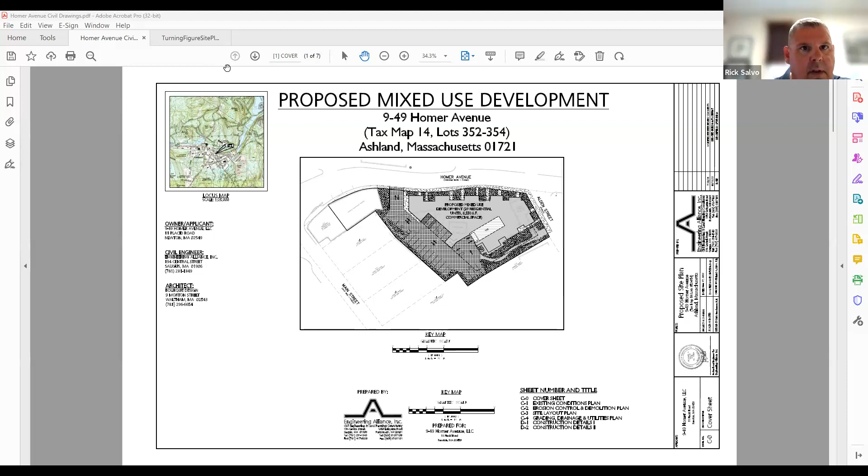Jump straight to the site layout plan here. So I think the largest changes since this was last presented had to do with the emergency vehicle access through the site.

If I switch real quick here, we had prepared, at the request of the fire department, an emergency vehicle turning movement through the site. Through peer review comment, it was suggested that a slightly larger vehicle be used, which is what you see here on the screen. It's called a bus 40. We had used a single unit 40 at the fire department's request.

The peer review requested a slightly larger vehicle, for which we show the vehicle path, which now will pass through this area right here, which will include a reinforced lawn comprised of a series of concrete octagon-shaped pieces that get filled with loam and seed, and then a lawn grows over them. They're maintainable, drivable, and H20 rated. Here's what that path looks like, zoomed in.

The gray crosshatch you see represents the building that will be sticking up out of the ground. The heavy dash line is the garage level below, which is below ground. This path right through here is a combination of reinforced lawn, H20 rated pavers for a walking path while emergency vehicles are not driving through there, and then regular loam and seed over the deck of the garage.

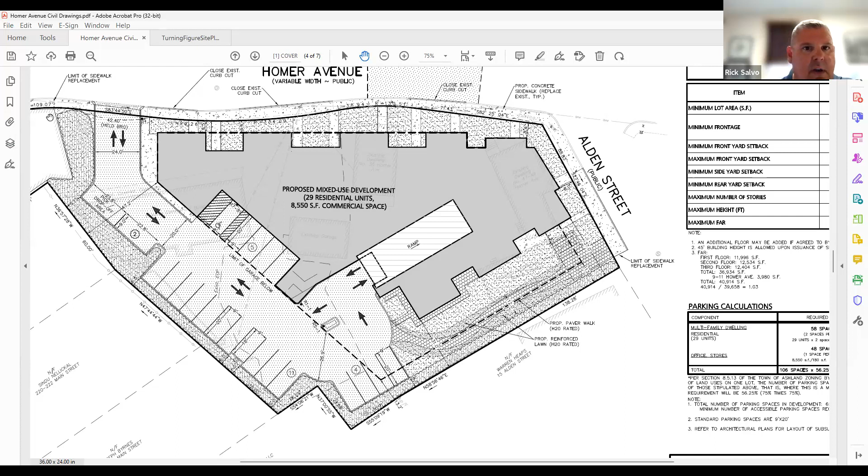Those are probably the largest changes. There were a lot of small technical changes that I'd be happy to walk through as part of the peer review comment, involving things like adding the utility poles to the plan, which had already fortunately been surveyed, and we added the fire hydrant locations, which would be at either end of the project.

We added a drain manhole on the overflow pipe and changed the overflow pipe to a reinforced concrete pipe in accordance with the town of Ashland requirements. We'll be repaving this whole section of road from curb to curb, because when we close this curb cut, there's a low point that would trap water. By eliminating that low point, it'll flow down to the catch basin like it's intended to, rather than into the site, which is what happens now. There were also some supplemental calculations required for the drainage system, which we've provided and included.

Those are essentially the site changes to the plan. I think, as you can see, by and large it looks like a very similar plan to what you saw last time, but those were the civil changes that were made.

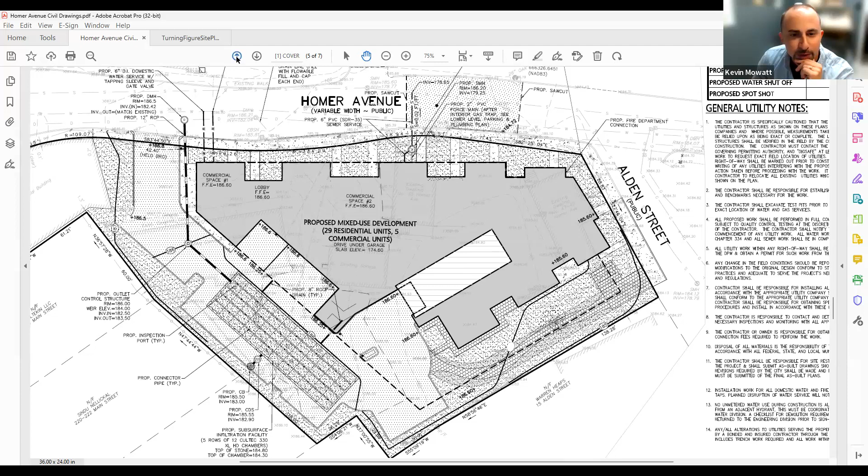Could I ask a question about the pavers? Did you say that they're plantable, or is it a mixture of hardscape and softscape within the pavers? The hardscape area, shown by this brick hatch, will be just that, hardscape. The area in between, with these octagon shaped pieces, if I zoom in here, between the regular loam and seed, will be planted.

And they're planted with what? Loam and seed, grass. What kind of grass? I'm not sure what exact species of grass. I'd defer to the landscape architect for that.

Can I jump in? Sure. So that is actually a clover grass and wildflower seed mix provided by Vermont Wildflower Farm. This is a very low growing seed mix that probably won't exceed 6 inches. It's clover and what? Clover, grass, and wildflower.

What kind of grass? I can check and get back to you when I present the landscape design portion of this. Okay, great, perfect. I'm interested in that in terms of its ability to withstand drought, traffic, et cetera.

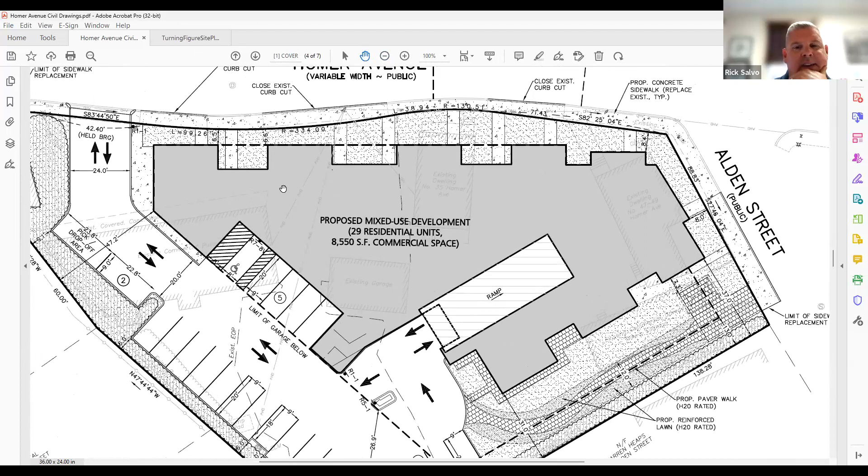Thank you, and what was the size, just since I'm taking the minutes, what was the size of that vehicle you were talking about? It's an AASHTO bus-40. So like I said, originally in the comments we received from the fire department, they wanted us to use a single unit 40. The peer reviewer suggested a bus-40 might be more appropriate, it's a slightly larger vehicle. So we ran that vehicle and it worked just fine.

Any other questions from the committee at this moment, or can we move on to let them finish the presentation? Oh yeah, I just had one more question about the drive lane for the fire truck.

Is the curb between the parking lot and where the fire truck would enter into that paver system area, would that have a chamfer on it? There's a curb there that would prevent normal vehicular traffic from going in that direction, but it has kind of a 45-degree chamfer to allow it, we'll make sure that this is a piece of granite edging.

That's a good point. I mean, they can come up a 6-inch curb reveal without issue, but why not make it a little easier for them? I think that's a good point. Yeah, I've seen that before, so I'm just raising the question. Yeah, we'll specify that piece as granite edging. I think that's a good point.

I don't have anything else, Kathy. You can continue on with the rest of your presentation. Great, thank you, gentlemen, floor is yours again. Ron, I'll turn the sharing over to you.

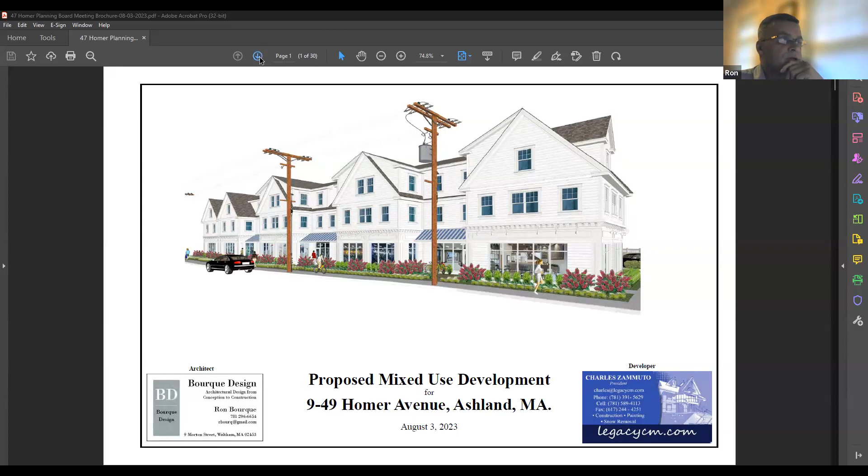So this was based on the discussion we had in our last meeting, addressing some of the issues and concerns that we had. I will just run through this, and there's also landscape in here which Julian will take over. This is the common information, so I'm just going to pass by this.

And the value in this is obviously in the shadow study itself, but also in the discussion about potential solar on the roof.

I think we can see that the south-facing portions of the building are really solar ready. The benefit is that they are not directly visible from the street, so if you're coming down Homer, unfortunately with solar panels, they don't always fit the roof correctly, they don't have triangular pieces and things like that, so sometimes it detracts from the building, although you're trying to do the right thing.

But in this instance, where we have this southern face, and even the face that's on the south, I guess the north side of the terrace, but the south face of the roof on Homer, gives us some opportunities to have, I think, some significant panels there, while maintaining the architectural look we're trying to achieve on the public side of Homer Avenue.

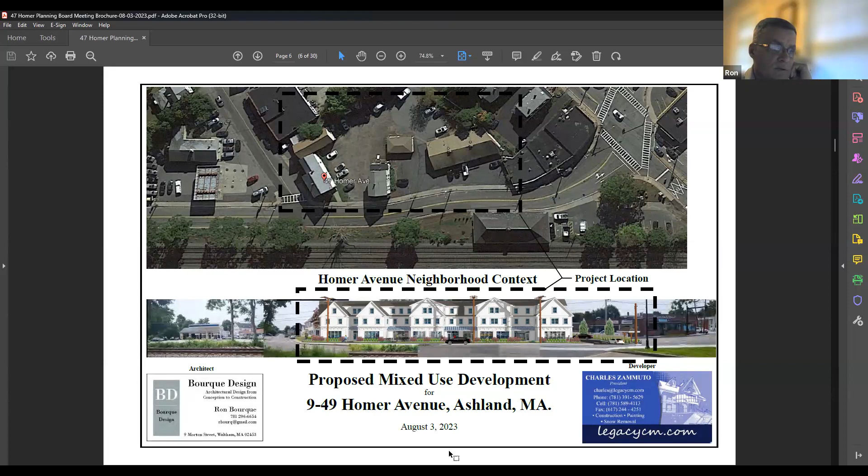It meets the massing. If we look at the Alden Street elevation next, we'll see how the volume is consistent with what's on that street. This is Alden Street, left to right. The right is Homer Ave. Our project site is shown, and then there's a massing of the building, which is a little skewed because of the way Homer Avenue runs, but it does give you an idea of how the massing would fit into the neighborhood.

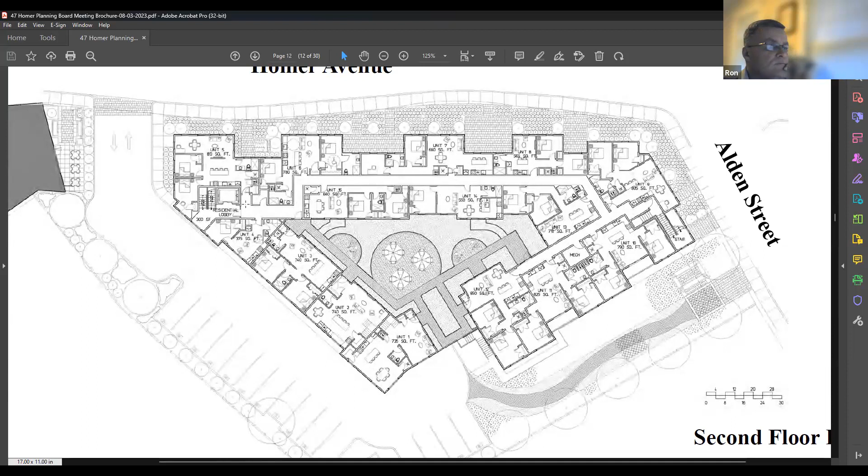I've also, in designing the units, paid attention to creating situations where you weren't looking directly across into a bedroom on a short axis, as well as Julian's planting scheme. We've kind of denied the space closer to the bedrooms along here with raised planters and plantings, so people will not be able to be directly above or directly in front of a bedroom window within close proximity. How high are the planters? They're 18 inches. Okay.

On the left side, we have smaller dormers, so it'll be a little more difficult to have anything really consequential, but it really does help the project's resiliency. Also, not having them directly on Homer — that's not the most efficient location for them — I think helps the project, because it solves that problem we always see with solar panels sticking 6 inches off the roof and being square boxes on triangular roofs. So you're proposing putting them on the flat roof sections, the 500 and 740, 750?

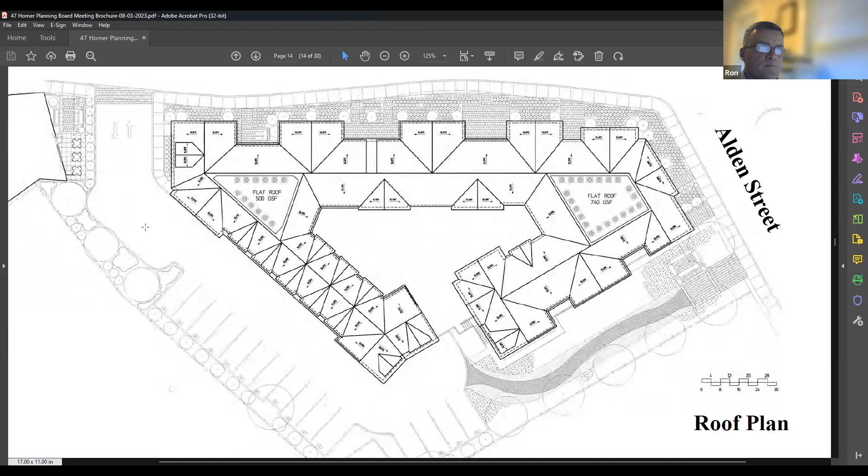Ron, before we leave the plans, I have some questions about level 1, if you could go back to that. My understanding was that we were going to see a plan that showed more commercial space on Alden Street, and I thought Unit 2 was coming out. Could you just remind me and tell us what transpired about that corner? Because I was expecting Unit 2 wouldn't be there, I think.

Well, we had discussed sort of reconfiguring it. I don't think we discussed enlarging it. I do have a stair here, which serves from the garage to the 3rd floor, which takes up this corner. Everything else beyond that is for commercial. Where's the entrance for commercial on Alden Street? Right here, in the corner? In my corner. Let me zoom in.

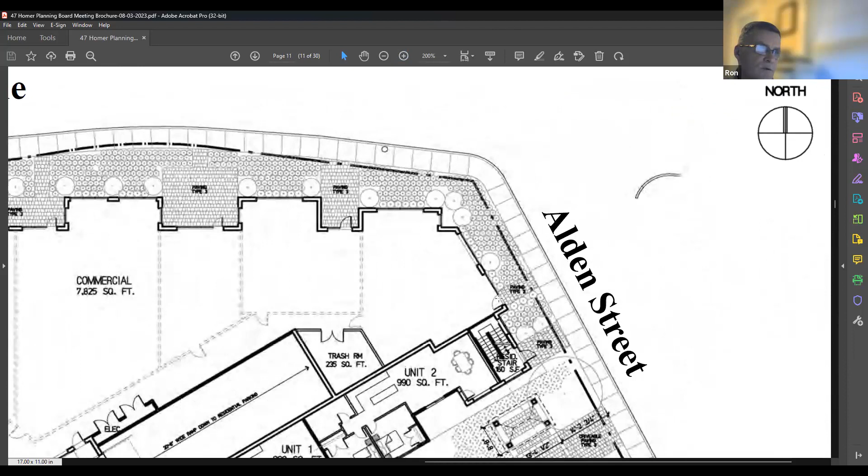So it's off the corner, off Alden Street.

I'm going to mark this up. Is this the space we were talking about last time, that the plan would be revised to show the additional commercial tenant space at Alden Street? That's this space here. There were originally three units along that pathway. One was eliminated and the other two were reconfigured. That's how I read it. Is that correct, Ron? That's correct, right?

So I'm looking at the previous first floor. The commercial went to the corner and the stair was essentially where the commercial entrance is. Then we had units 1 and 2. Unit 2 extended basically to the corner of the trash room. That was pulled back, and that space was given to the commercial space, noted here as 800 square feet. I'm not sure of the exact square footage, but I think it was comparable. And the stair was shifted to the corner.

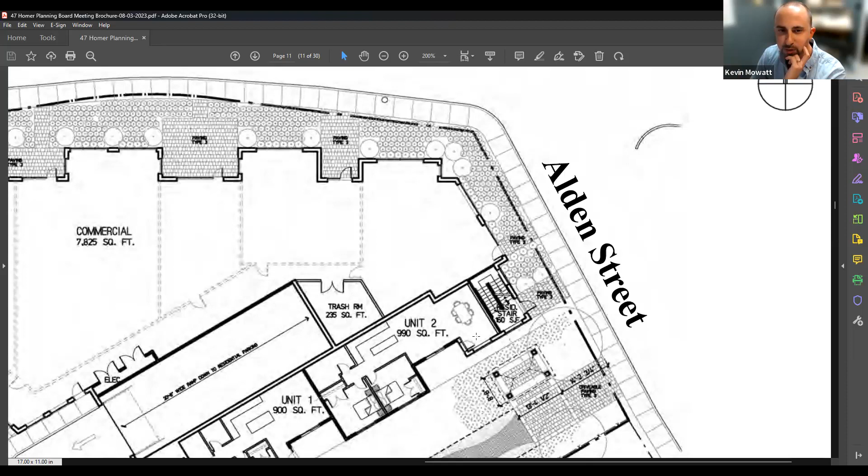So the commercial space was shifted more towards Homer Ave where this door is located. But I found the plan that was provided previously where the stair was shifted, sort of in this location. So what was the reason for moving the stair?

Well, if you go to the basement floor plan, there's only so many locations that the stair on that end of the building can be placed. The building notch is in here. The stair was located approximately where space 28 is, and it created a situation where traffic coming down the ramp was running directly into the stair, which I didn't think would be a good idea for pedestrian traffic walking through there, and then find a common area through the first, second, and third floors.

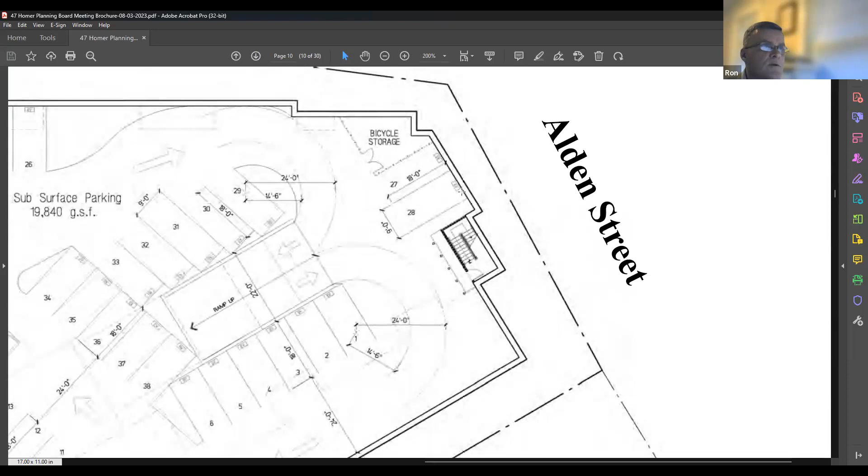I see, okay, so it was a result of continued planning efforts. Yeah, that's right, that's correct.

Okay, so my other question was, is this the second floor? We had talked last time about shifting this bar plan north, and you said you moved the south wall, the south red line, but did the whole bar move to modify the depth of the recesses at Homer? It did, but it only moved 2 feet, I believe. The impact on the roofs made it very difficult to resolve the ridge lines. So I was able to move it 2 feet, and then on unit 12, the wall south of the...

I guess I could use the same thing you're using. Sorry. The wall on unit 12 was shifted back as well, to give myself the 4 feet we were asking for—I couldn't get it all on Homer Ave.

So when you did your shadow study, did that move more of that patio into the light? The plantings? I didn't do the shadow study with the older version, not in the same fashion. I did it on the renderings, which showed it, but I did not go through this particular process.

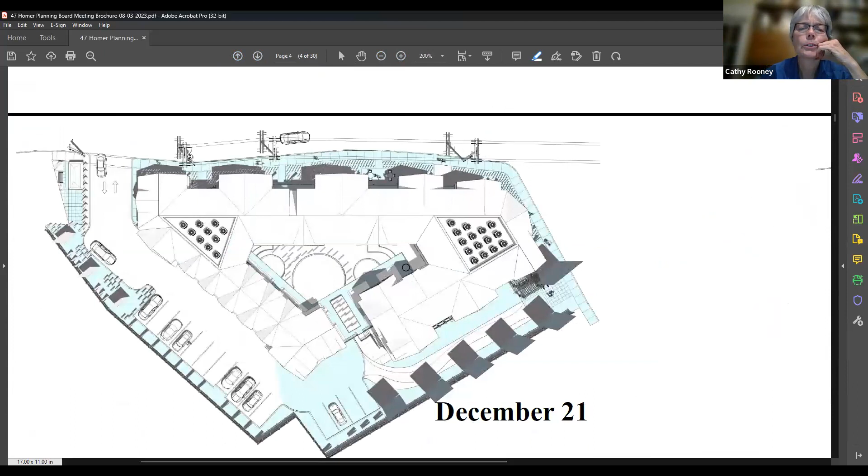Where does it show it? Can you blow it up so we can see those more clearly? They're pretty small. Yeah, I want to see what it shows in the... So this area, December 21st, noon, shows a small shadow. Okay, March, slightly larger. September.

And those shadows on that are from what? In the September shadow you see here, the peak is this ridge to the south of the shadow, and the hash, the little rectangles you see, are actually those plantings I have in the model, but they read as squares when they do shadows—they don't read as a silhouette of the plant. Okay.

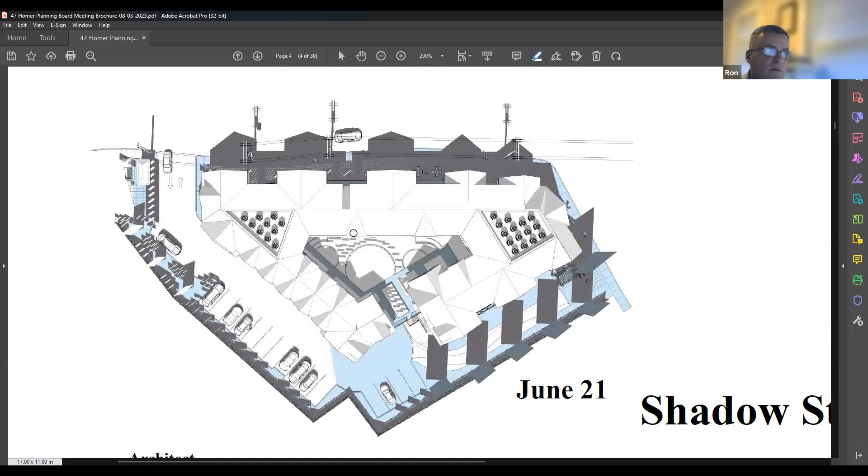So what time of day is this one? They were all done at noon. So the one in December has less shadow? That's what I'm wondering—if I may have reversed one.

When Julian's talking about the landscaping, I'm going to go off share screen and check those. Okay, that'd be great, because that was one of my concerns—what's in the planters.

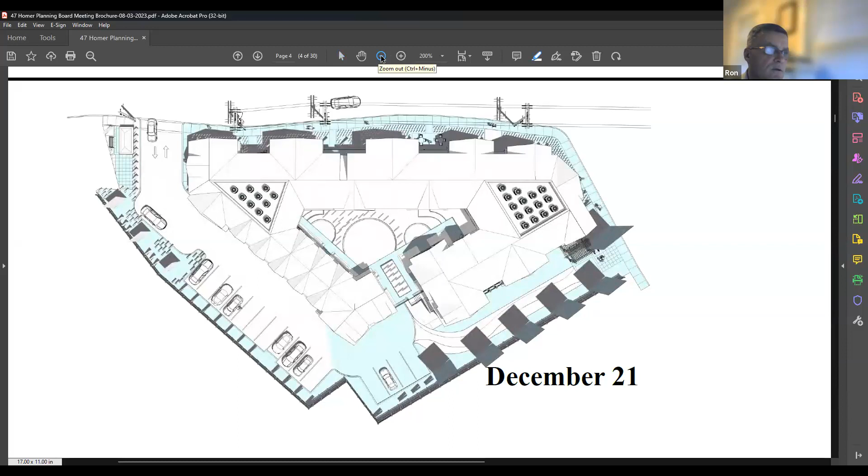A lot of that looks like material that needs more sun than it might get up there if it's in shade during the growing season. Yeah, so as Julian's speaking about his landscape, I'll open the SketchUp model and make sure I didn't reverse these by mistake. Okay, great, thanks.

Does that answer your question on the commercial space? Yeah. The other challenge is to maintain the square footage and parking count balance. If I added 1,000 square feet, I wouldn't have enough parking spaces on site to cover it. So that's the back and forth we're constantly struggling with.

I was just making sure we're looking at the most current iteration of the plan, and it sounds like we are, so I'm happy about that. I'm looking at the previous iteration of the level 2 layout.

After shifting the bar closer to Homer Ave, it does seem more generous. Can you go back to level 2? I think previously there was more undulation to this facade inside this courtyard. I wish it was larger, but I think it's more generous than what you had previously. So I'm not going to comment on that further right now.

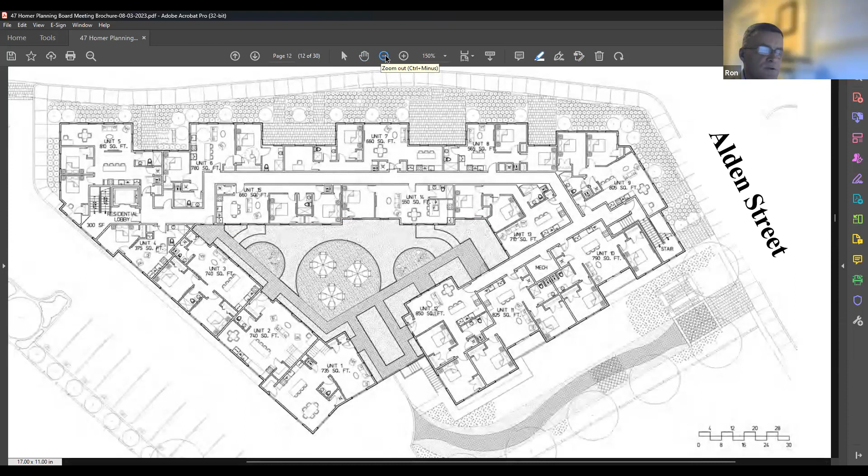So it looks like the overall layout of that courtyard space is new. You completely reconfigured it, right? That's correct. We looked at the plantings, the raised planters, and the comments that were made, and Julian went back to the drawing board and came up with an alternate that he'll discuss, hopefully something that appeals.

So there's a request to do the straight-on elevations, which we had done, it just wasn't part of that package. You haven't sent these in to us yet? This was part of the original package I sent. Okay, good, that's what I thought.

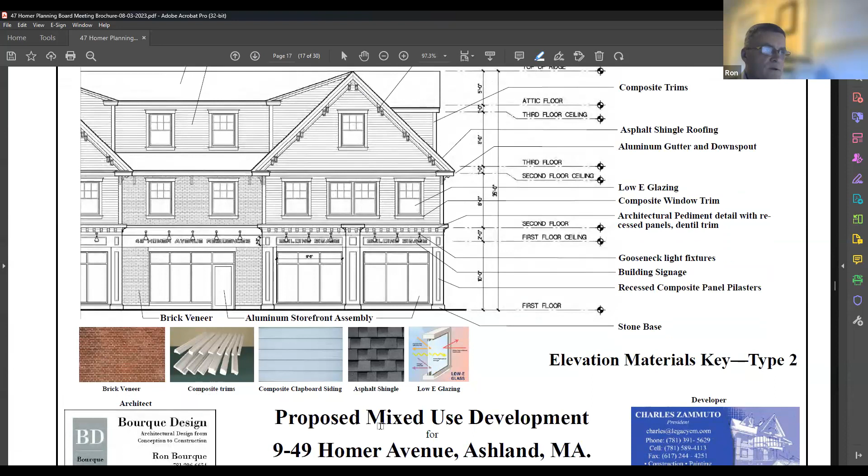Now this one, Elvar, the package I sent you this afternoon, because I did a series of swatches on the side here for materials, colors, potential trim colors, complementary colors for the trim and siding. Yes, I did share it, Ron, at the moment I received it, I shared it today. Okay, but that's not this file. No, that's the file you sent me today, this afternoon. So I will follow up, but there are color swatches here representing the trim, the field, and complementary colors if we were to go with this type of scheme, for example.

So what the applicant shared isn't what we're looking at right now? No, this afternoon I had added boxes here showing different Benjamin Moore colors for the color board. All right, so when are you going to send what we're looking at right now? I'll resend that sheet when Julian jumps on with the landscape.

Okay, great. Actually, Kathy, you should have it, I sent it today around 4. Oh, that's the one I saw. Yeah, 3:46. Right, excellent, because I did add some green roof details, just some standard details, and I added these color swatches. Okay, thank you everybody for sending it on.

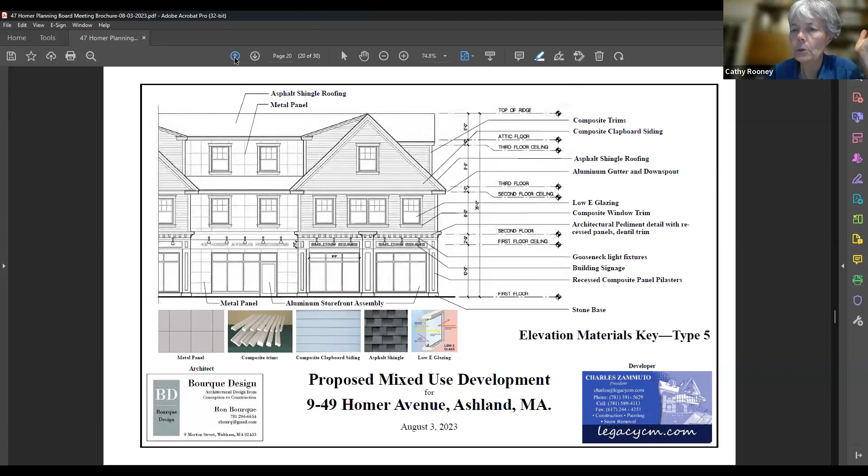Kevin, Hannah, or Bill, do you have any questions or comments about what we've just looked at? I think we should pause and talk about the architectural materials. There were 5 total. The first one I saw was number 2 with the brick in it, elevation materials - that's the elevation that's on the model.

I just want to make a note, Ron, I think you're showing the not-updated version, just the last file you sent me today. I know it's not the updated version, but the only changes were the materials I showed on the left, and there's a couple details. So I'm going to go back to that, and we can revisit this after Julian's presentation, if that can move us along, and I can get the correct file up. Sure, excellent, thanks.

So Julian, can you pick it up from here? Yes. If you could just move the mouse for me, Ron, and indicate the areas I'm speaking about, that would be wonderful. I'm going to start from the front, then move to the left side, to the rear parking area, and then the right-hand side. But to preface, while designing this project, low maintenance, drought tolerance, native plant selection, mature plant height, and solar conditions were all taken into consideration, and all trees, shrubs, and perennials are shown at their mature sizes.

So we're starting in the front, along the front of 9-49 Homer Ave, in front of the large floor-to-ceiling windows, we have a layered mix of perennials and shrubs. From front to back: Carex albicans, Geranium maculatum, Chasmanthium latifolium, and then Hydrangea quercifolia Ruby Slipper. They're the largest shrubs along the front, reaching 3 to 4 feet tall, used to soften the architecture of this development, and located in places that won't obstruct the large floor-to-ceiling windows.

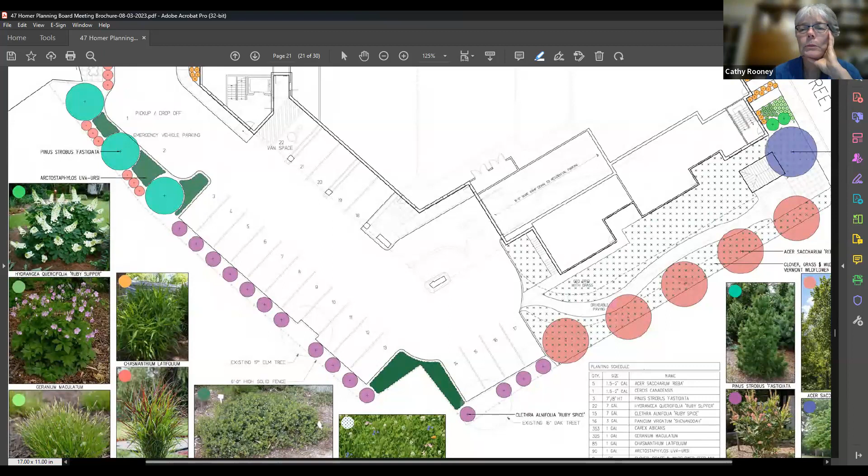Okay, I think you ought to take a good look at the solar values over there, and I don't know how many plants you'd plan to put in there. Maybe you could do them right next to the curbs on the outside and put juniper in the back or something, but I'm fairly certain some of that will not last, and then you get weeds in there. Okay, no, I'll think of a backup for the Arctostaphylos in those locations.

May I continue along the rear parking? Yes, please, of course. So along the rear parking, it consists of a 6-foot wide planting bed that separates the parking spaces from the white fence we were just talking about. Inside this planting bed is going to be a mass planting of Clethra alnifolia, specifically Ruby Spice, a deliciously fragrant variety of Clethra alnifolia. Over time, these will reach 6 feet wide by 6 feet tall and form a thicket, growing together eventually, screening out the fence and offering fragrance and beautiful flowers during the season.

And then I have a note about the Arctostaphylos uva-ursi in between spaces 13 and 14, but like we talked about, Kathy, I will look into alternatives for that. There are some existing mature trees in this area, I believe in front of space number 10 and 14. There are existing elm trees and oak trees, so we're just leaving space for that, and I'm not planting anything too close to them.

All right, so this should show those trees. It does. Oh, I see, got it. Okay, we have a little bump out in front of spot number 10 just to accommodate it.

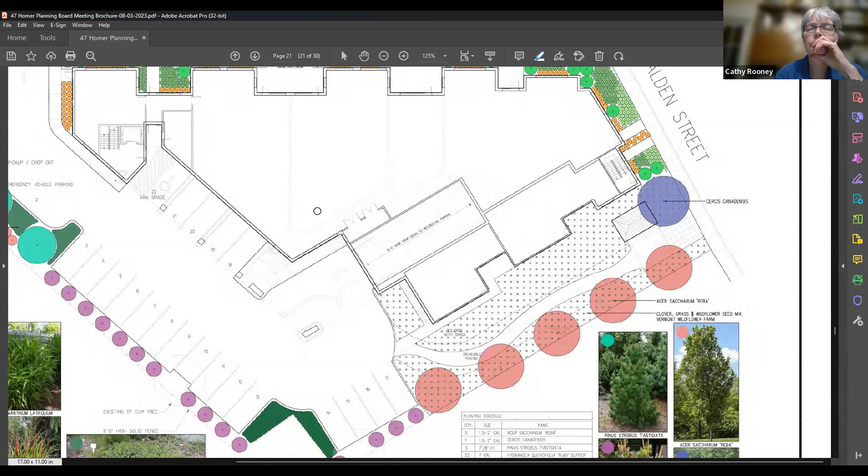A lot of the specs are listed online too on their website, including detailed info like the specific varieties that are included in the seed mix, as well as other information.

Okay, great. But that is all I have for this planting plan right here. I'd love to hear any questions you guys have.

I noted the question you had, Kathy, about the suggestion to potentially replace the Arctostaphylos uva-ursi with another more shade tolerant ground cover. I'll look into that. Or you could keep it towards the outside, where it'll get more sun, but where it's close to the fence, I think my experience says it's not gonna have a good time back there.

And then I want to take a look. I want to see the front of the building, that part blown up more, please. Sure thing, thank you, Ron.

Can you slide the screen so more of that is visible, yeah, that's exactly right, so the facade is more visible. Thank you.

So if your commercial tenants wanted to sit outside, if they had benches and stuff, are there plans for site furniture out here? I'm not showing any site furniture out here. We just have patio space in front of certain commercial areas. There's certainly room for it, and it really comes down to what kind of tenants end up renting a space. So you wouldn't provide it as a matter of course, the tenants would be responsible for it?

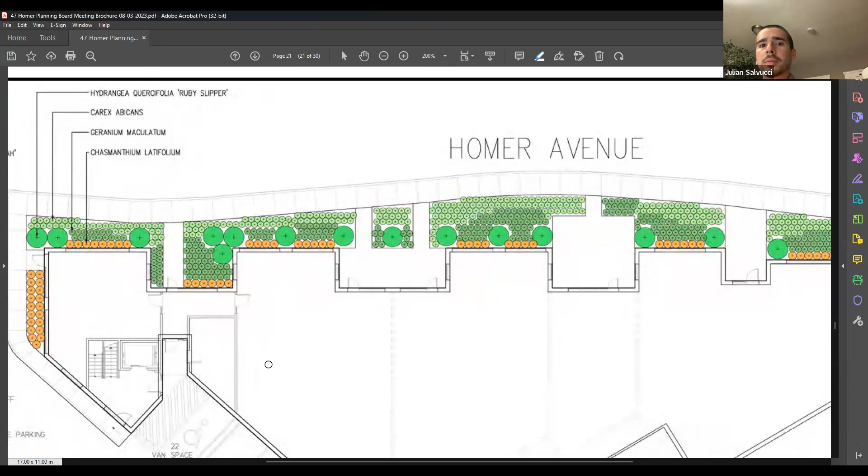Okay, well, we'll just have to see. So whatever you can do out there to make it a little more colorful draw down the street would be helpful.

Whereas you at least get the flowering of the cercis first thing in the spring, which would be really nice. I know that Brendan was looking for a more fastigiate thing on the corner, and then you could go to a non-native plant out there, but I'd be looking for it to be flowering at some point. No, sticking to native species too is important, so that really limited the plant selection for this.

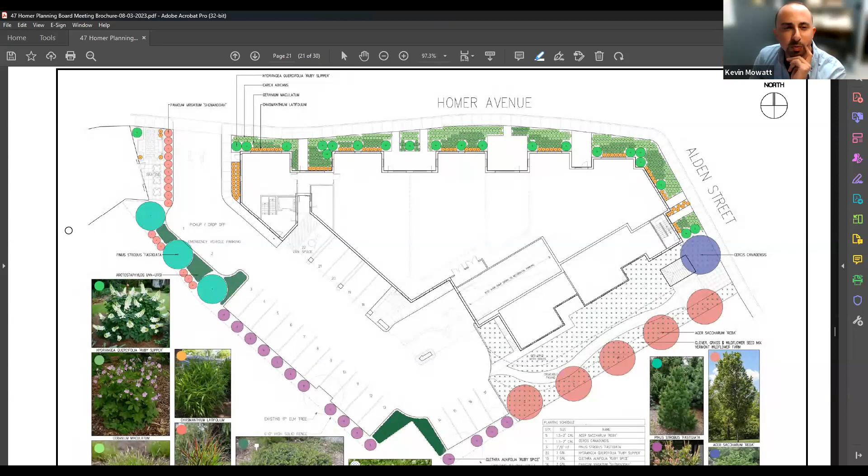Cathy, can I make some comments on the patio spaces, since we're in that area? Absolutely, please do. Ron, could you just zoom in on that northern section of this?

So I'm just wondering about the attitude that you're taking towards each of these patio areas. I appreciate the fact from last time, all of the commercial entrances are now in the middle of each of these recessed bays. And I'm just wondering if it is going to be difficult to maintain the plantings on this north facade that will be in shade, do we reduce the amount of planting here and develop an attitude towards these patio spaces at the same time?

I'm kind of thinking leave this one the way it is, but then extend all these patios out to the face of the sidewalk, just so that we're giving the tenant spaces the same opportunity to fit out these patios with site furniture and cafe tables or whatever it might be, to make it more usable and inviting to the public. And it sets up a rhythm. The site landscaping has an attitude just like the building does.

No, I think that's another way to look at it. When we get to the renderings and look at the paving patterns, I did carry some of the paving pattern across the drive lane from the Pocket Park, like you mentioned, and then I also carried it into these spaces, which I thought was a good move. But yeah, the shapes, I guess it's what you're trying to accomplish.

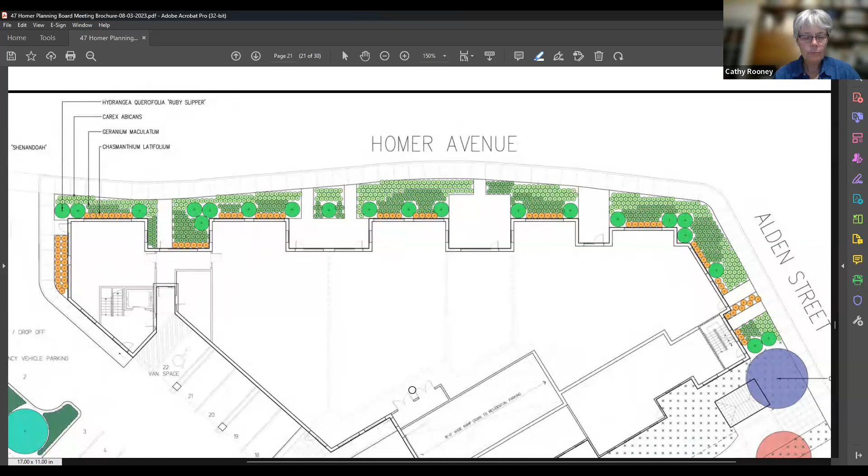I just have to go back and look at a couple of my client notes to tell you what it is, because I honestly don't remember right now. If you could send it over, that'd be awesome. I'd appreciate that. It might take me a few days. I might have to go up to the wholesaler and go around in the back there - they literally were plants that were selling for use in Christmas containers, and then you could plant them up, and they're nice and small. So I would buy a whole bunch and then plant them up in places where I didn't want to be doing a lot of digging, but I needed coverage eventually.

So if we're concerned about the canopy of a tree interfering with the architecture - I think I'm combining some ideas here - but if the tree was out here towards the sidewalk and was in an urban plaza grate, it's not within the landscape, but is embedded within the hardscape. Maybe that's a location for where the tree could be. It's kind of near the recess and wouldn't be impacted by needing to be pruned because it's growing close to the building, to the architecture.

But where are the telephone poles in the plan? Are they shown in the civil drawing? That would be my concern - the telephone pole locations and the wires. Can we go back? Let me just reopen it. You can see them here, here, and here.

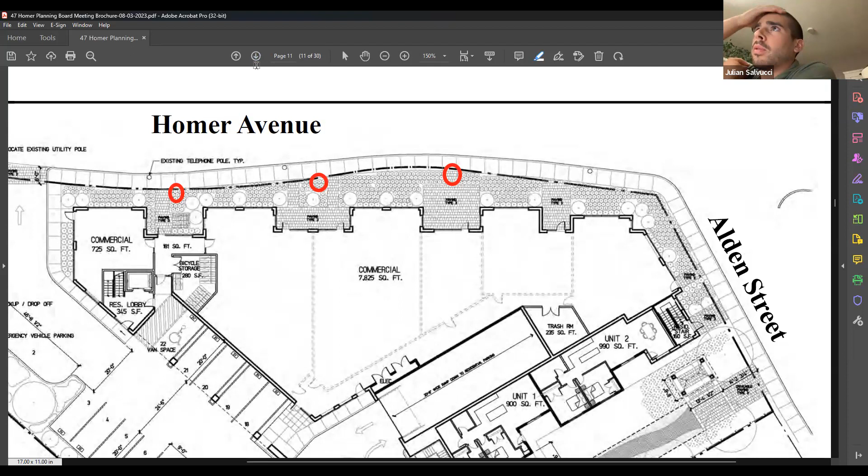That also limits the type of trees that can be planted along the sidewalk. Eastern redbuds have a mature height of 20 to 30 feet, so I'd be iffy about planting those underneath the telephone wire.

You could also look at some other large shrubs, maybe like an Amelanchier, a serviceberry. They'll still provide shade but won't get massive, and they're easy to prune and keep in check. So look at some of those, and make sure they're salt tolerant and will tolerate the heat. I actually love Amelanchiers, but I don't know if they'll tolerate the heat.

I'll look into that. This is going to be a shady side too, northern facing. Maybe if you had the raised planters and had those trees directly behind them, that would help with their roots, keeping them cool and deflecting some of the heat from the pavement and sidewalk back out at the street.

One thing too, going back to the serviceberries - obviously they produce berries in the summer, and that could get messy along the sidewalk. At some point, we've done a lot of taking away from nature, so you'll have birds in the trees. It'll be very charming and pleasant, that way of thinking.

Before we get off of this paver - I know one of the other committee members, who I think isn't here or might have joined late, we talked about these patio insets being permeable at one point. Yes, we did. Are they permeable?

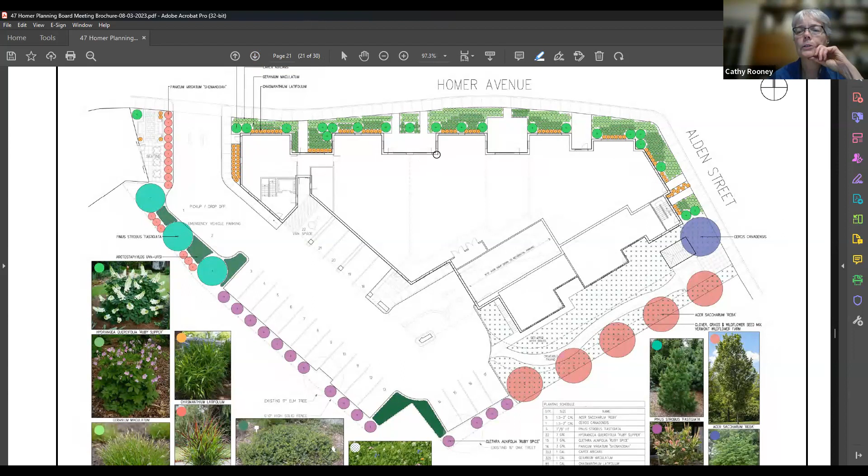My only concern is making sure we're ADA compliant on the pathways. As far as I know, all permeable paving is ADA compliant - it's more about the levelness and straightness of it, and then having it be permeable. I've installed them before. We can certainly look at it as our first option and see what we have for selections.

I agree, stormwater management is important, especially in this area. It's important, period, and getting more so with these crazy storms we keep having. It will also help with snow removal in winter, because the ice melts into the permeable sections, so you have a lot less ice to worry about and don't have to salt and sand out there. In fact, you're not supposed to.

Okay, let's move on. This was the pocket park across the street from the train station. This was a design along with paving patterns, and this goes back to the initial planning board desire to speak to the train station. I know the comments in the latest document said we didn't have to speak to the train station, but I think this is a successful way to do it.

We're not trying to mimic architecture, we're not trying to put Richardsonian elements in a non-Richardsonian building. But by taking just the colors of the building and the paving pattern and integrating it in, we've created a kind of symbolic relationship between the two.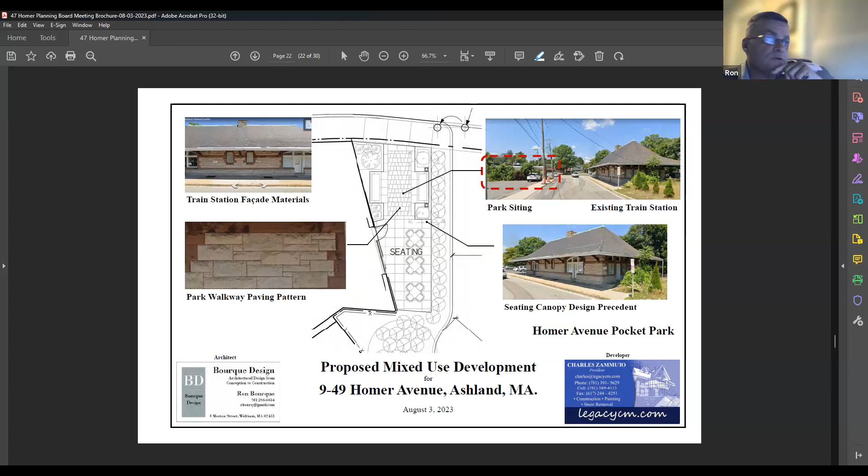So then the second floor terrace, Julian, I'll let you describe what your thoughts were there. Thank you.

So the main feature of this green roof are going to be the 18-inch tall Corten steel planters. They're indicated by the darker line, shown on the north side of this plan. A seed and herb mix will be sown inside of them. The circular areas cut into these steel Corten planters are areas with artificial turf, space for people to have outdoor furniture - tables, chairs, recliners, stuff like that.

I believe we have 4-foot wide walkways that take you through the space. There's also in-ground LED strip lights that go along the rear side of those circular astroturf areas to provide some nice ambient light in the evenings, and you'll see pictures of that on the bottom left corner of the plan.

Yes, that is it. So do the plantings actually provide privacy? What's the tallest plant that might be in front of a bedroom window? The raised planting beds themselves are 18 inches, and the actual height of the seed mix gets to be about an additional 18 inches tall - the tallest plants in this mix will be an additional 18 inches.

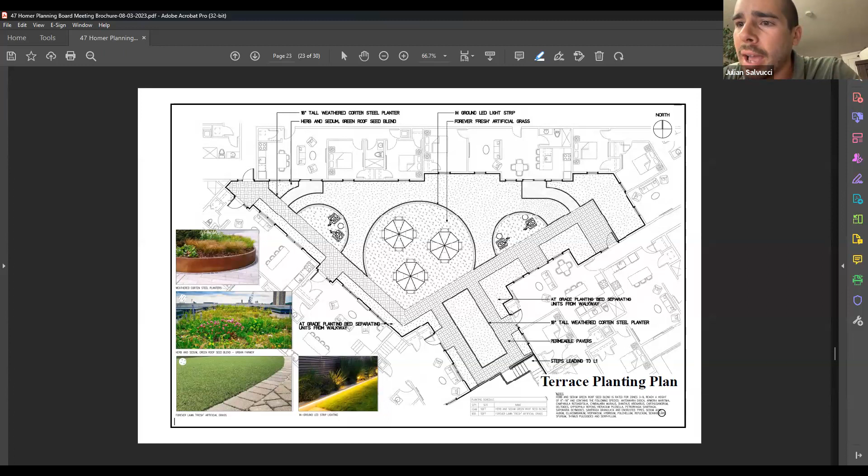What's in the mix? Ron, if you zoom into the notes section underneath the terrace planting plan, I have a list of the plants included in this particular mix. The name of this mix is Herb and Sedum Blend, Green Roof Seed, sold by the Urban Farmer. I actually called them to get the actual mix, but there isn't somebody there who can tell me what it is right now. This is information I pulled off of their website.

These guys all need a lot of sun. So I'm concerned about this not getting enough sun out there - that's my first comment. My second comment is I don't like the fake grass, it gets extremely hot in the summer, and it's not anything remotely environmentally sound. I'm wondering what else could be done out there besides fake grass that would be inviting - I don't think you're gonna have anybody sitting on it, so I'm not sure what the need is to have fake grass, why you wouldn't just use patio, some other kind of patio or something else out there.

Yeah, that could totally be another type of permeable pavement. That could be a crushable ground cover, something that's tolerant to people walking through it. Have you tried using something like eco grass or eco lawn, which is mostly fescues?

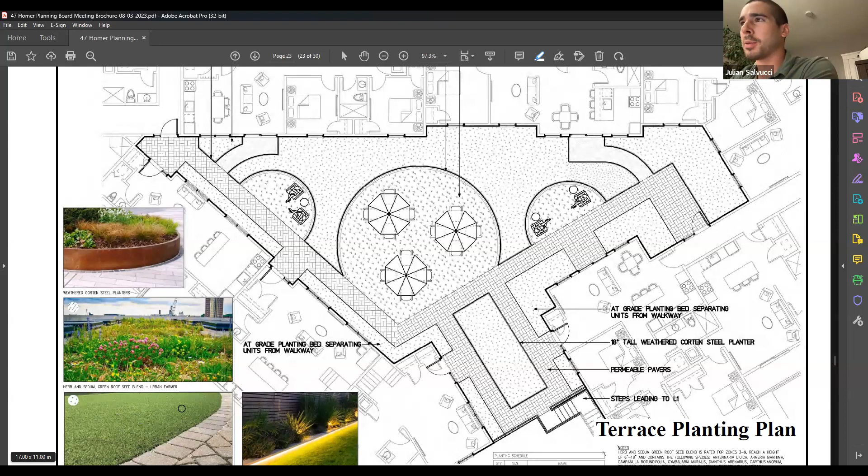Okay, that would be great, because I can hear the comments of a couple of people in town right now if they find out there's artificial turf up there. Yeah, it was really just selected because, in the off chance this was a high traffic area, I didn't want anything to get beat up by foot traffic. But no, I like that.

My sense of the grass piece is that I don't know if anyone really expects to be walking on grass on a green roof, but what I've seen is that the walking surface, or even where these tables are located, is a permeable paver. And then the vegetation is within contained planters, like the Corten steel planters you're proposing. But what is the permeable paver being proposed? Is it a masonry product?

That's going to be specified by Ron, the architect. Okay. Because I think something that might be nice out here is like a bison wood paver, and maybe you don't need the grass you walk on at all. Maybe everything is the wood paver, which gives it the warmth, and then you let the vegetation stay within the planters.

That might work too, I love that idea. What color is that, Kevin? Well, there are many different colors - I'll let the design team pick, but they have light wood colors and rich, dark mahogany colors. Awesome.

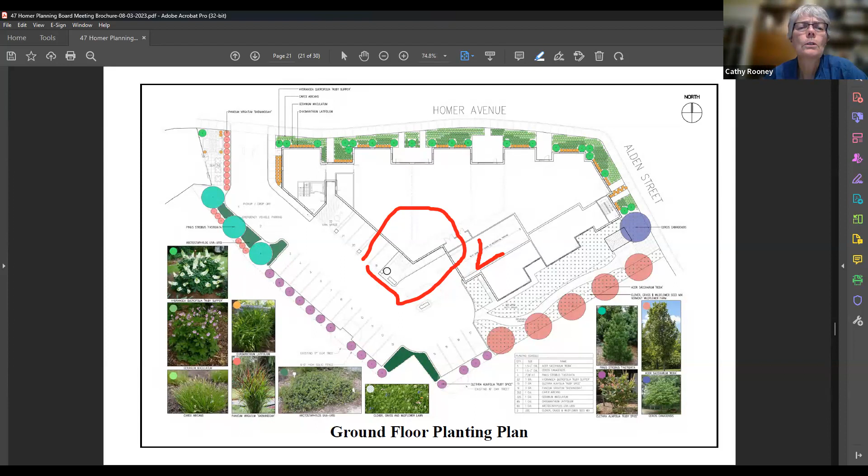So, going to the facade - we do have building signage lighting, which will light back at the building. I'm showing a gooseneck style, but it could be something LED that's a little different, the idea being that the signage will be lit. Presumably, while the buildings are open, there will also be light coming out of the windows.

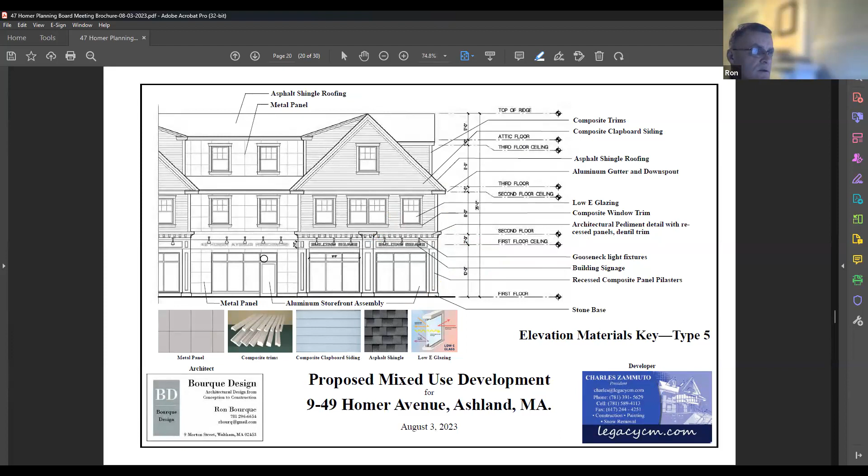Is that new, that there's a stair that goes up to the green roof? I didn't think you had a stair previously. There is - he had it previously. It went straight at one point, and then I shifted it over to get access and to provide some relief as I started to develop these apartments.

Is that stair going to be controlled and only accessible to residents, or would the space be available for use by the community? Well, the idea is that this is residential private space. The controls would be at the entry doors into the building. There's no gate or anything here.

So how does that get secured? I don't know, we suppose we could find a way to secure it, but the intent wasn't to secure it - just to give residents access to get to their units, and have the building hallways themselves secured. That's in the back where that is? Right. So that'd be right here.

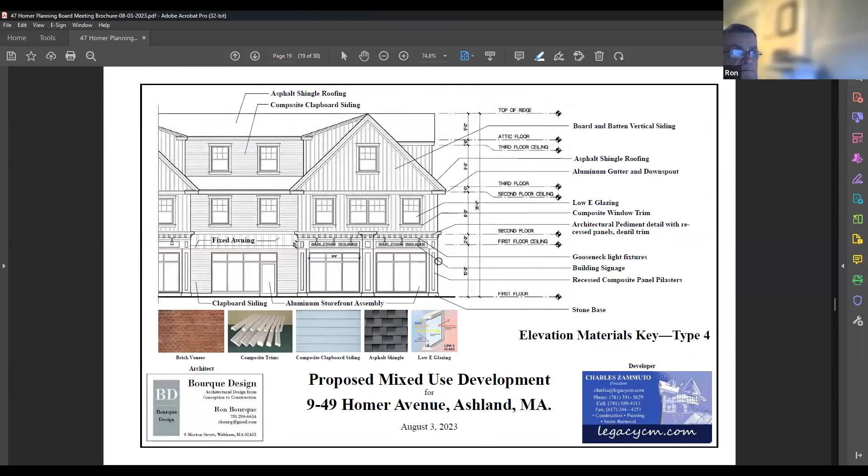Is that the only way to get into the units that have their front door on the green roof? That's not the only way to get to them, is it? No, you can enter into the building through the elevators, and then you'll be exiting to get to the unit for these units. There'll be sort of exterior entrance units - this one you would be able... let me take that back. Each unit, with the exception of I believe one...

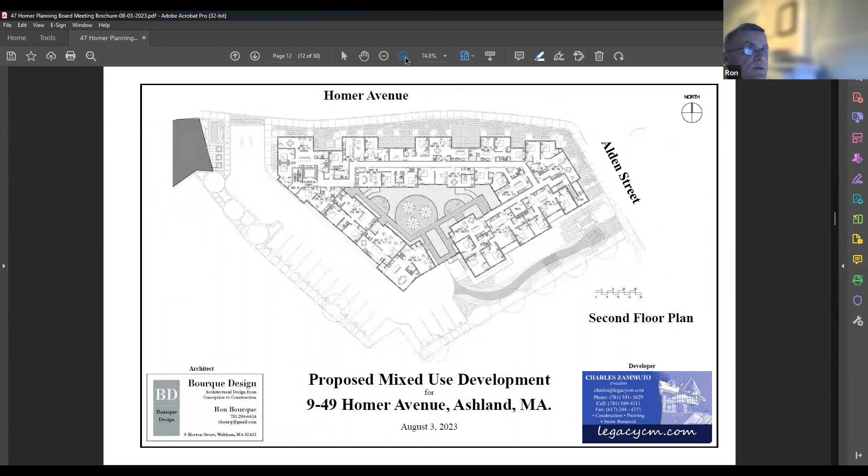Has an entrance, an internal entrance off of the hallway, but does have an entrance onto the green space. So every unit, you'll be able to come in through the lobby, use the elevator, and enter your unit. This unit, and this unit, would be accessed solely from that green space.

Has that been reviewed by a code consultant or by the building inspector? In terms of egress, I'm just curious if that's compliant. Well, I'll do an egress check on it, but this width is 24 feet, I believe, so it'd be sufficient to come out and down through the building, once you've exited to get to a public way. But I'll certainly take a look at it.

So this really became a function of the width of the building versus getting a hallway that would come down and actually work with these. I would just advise having that checked, because it's not a matter of distance - it's a matter of you're not exiting your unit into a rated corridor that gets you to a right of way. You're making your way across the roof of a building that could potentially be burning below you and is not rated.

So I've done this before - I actually did it on a healthcare project, and I know there's code, there's the ability to do it. The roof is going to be rated, it's a separation of uses, so I will check that. I appreciate that. Okay.

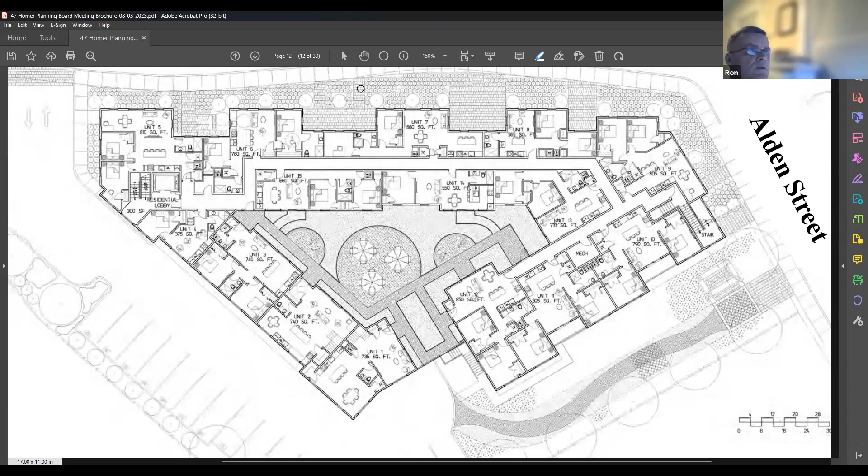Before we leave the topic - it was brought up a while ago, but I wanted to go back to the pocket park, I just had one comment, more of a question actually. Which pocket park are you talking about? The pocket park that is at the entrance from Homer Ave, the little triangular one. Sorry for going all the way back here, I just felt we left this quickly and I wanted to revisit it.

Are you proposing the duotone colors? You said you were going to take some colors from the historic train station, but would it be both the light beige color and the dark red terracotta? You'd be using both of those in the landscape? Yeah, I believe in the renderings I'm going to show you, I showed it, and I do believe I used a border on a few of them, similar to this.

Okay, I'm kind of hesitant to do that. I like the idea of using the same pattern to relate back to the train station, I'm just wary of using the same colors. Well, can we make it here - yeah, see what it looks like first. Yeah, sure, we've got renderings - let's take a look and see what he's got.

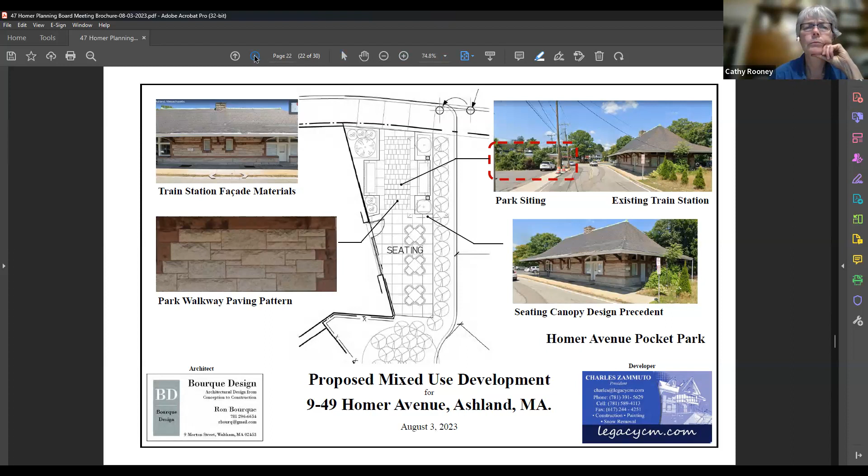So in this, I'm going to zoom in here.

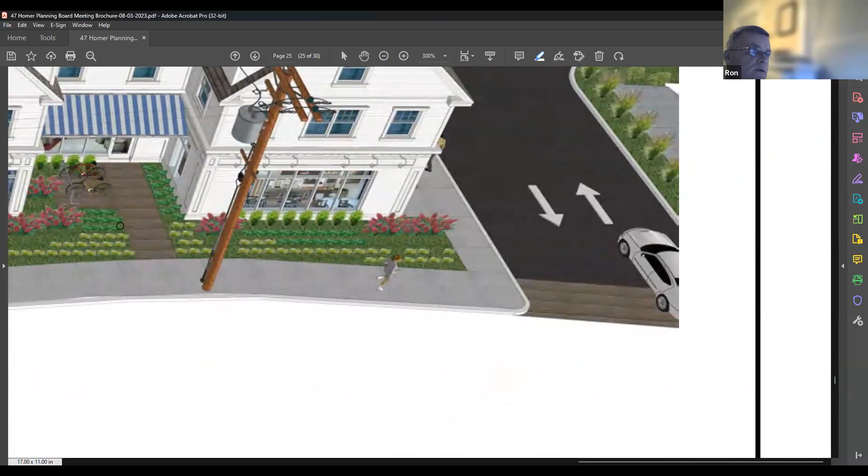This picks up that patterning across, basically a crosswalk that we've created to separate Homer from the parking lot. And then it continues, and I did not show it as a border here, I showed it as a consistent color along these patios. As I develop this, I could develop it as a border and have dual tone, but the idea was to have that vocabulary and acknowledgement of the Richardson building carried in the paving pattern, just very subtly.

Let's see if I got something a little better than this. It really doesn't show it, but this shows the plantings that Julian had selected.

So I think this is where both Brendan, who's traveling, and myself are missing trees in here. And I really hate the fact that your building has these poles in front of it. But if you can figure out how to get some trees in here, that would be helpful, or taller shrubs to help break up the mass, because this is a really, really big mass. It's a big change for this area in terms of the massing.

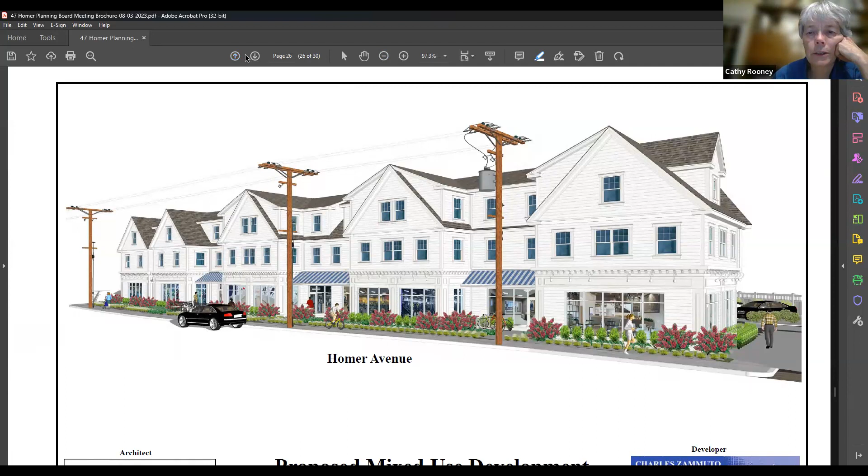Those wires are actually in line with level 2 and not higher than the roof line of the building. They should be down farther. Is that what you're saying? Yeah, I'm asking the question about where they're actually located because this makes it look like they're high up above the roof line, and exactly, would not be impacted by a tree that's even 25 feet high.

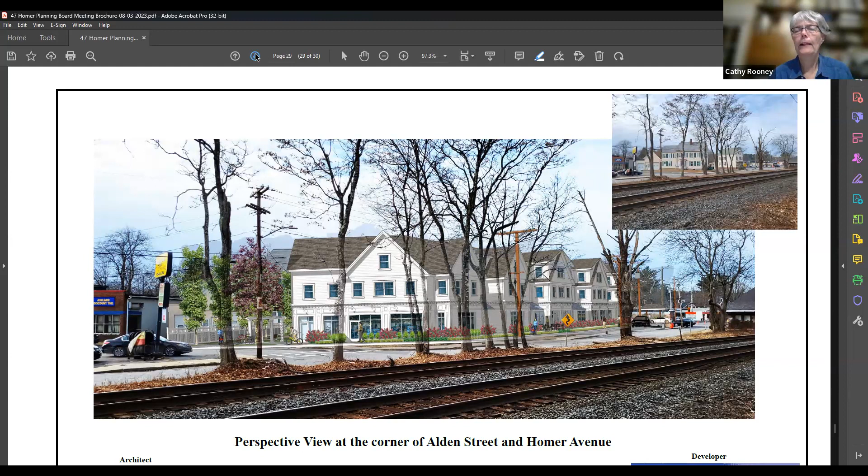So what I'd like to do is take a second and go back to my email for what I sent out so I can show you the color study. Just bear with me one second.

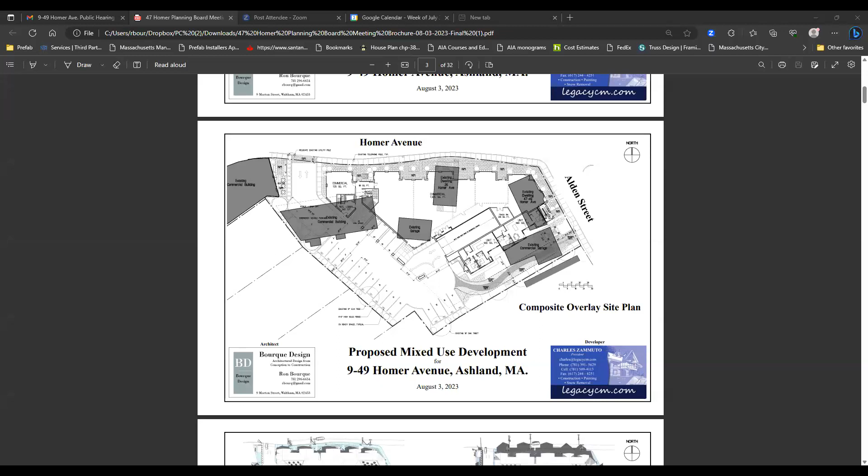Okay, can you see my screen? Right now, yes, it's got Alden Street and Homer Avenue facades on it. Okay, now I've got the new file loaded, but it says my screen sharing is paused. Resume share, probably you'll have to reshare it, like click out of this one and then reshare it, Ron.

Okay, can you see my screen? Yes. Okay, so we have the elevation materials key. What I added here was just some color palettes, potential color palettes for trim, field colors, window frame colors and things like that, so we get a sense of how these things would come to life in the different scenarios.

So it's not that bland gray I'd shown in the original models. On this one, the clapboard maybe a darker color to help these pop with a cream trim color and a black window frame. And then we get back to more of the grays. Where's the one with the brick? So this would be two stories of brick veneer, running the clapboards up and over as a frame for it.

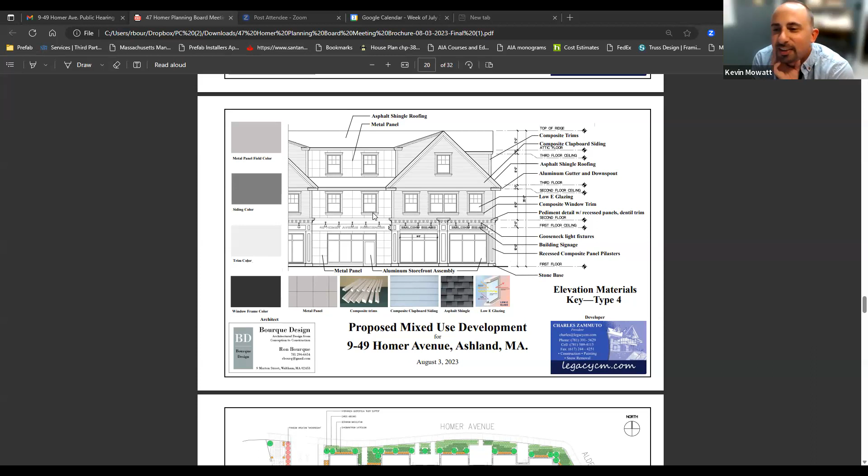And then this one would have a metal panel on the recess with traditional clapboard on the extrusions. I think this one mixes and matches modern and traditional architectural elements a little too much for me. Yeah, I'm going to second that comment. So you say it mixes too much? Yeah, it's matchy. Ujwala? I agree with Kevin, yeah, I don't like the metal panel. No, it's just an option of introducing a more modern style with it.

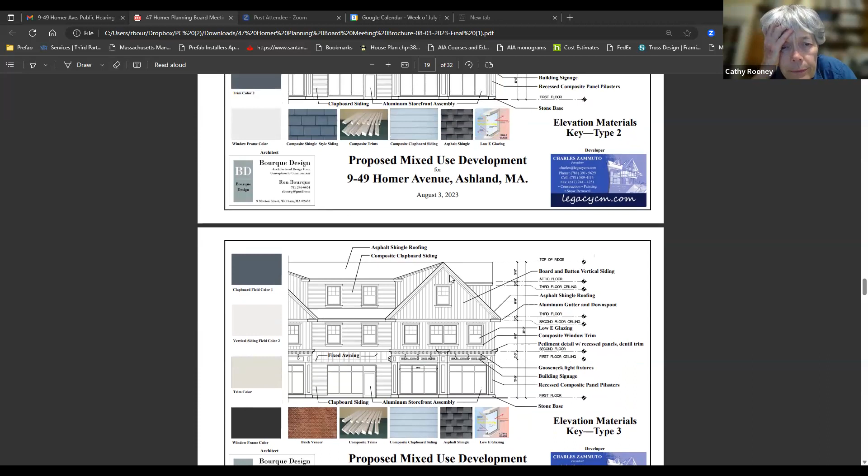This one, the board and batten, I wanted to show because it's a popular vernacular now, but I don't think it's appropriate for this. It's a style that 10 years from now you may look back at and say why'd you do that. I'm going to agree with that. And it makes the building look taller. The shingle style of both are traditional New England. It does create a datum line at the top level and lets the first two stories read.

And then there's this combination of the brick and the clapboard on the recesses, so you do have a defined feeling that this wall is not 3 stories high, it's 2 stories high, just from the materiality. And then the upper clear story is a little lighter.

Is there a type 4? Did I miss that? When I did these, I renumbered them to 1, 2, 3, and 4. Before it was 2, 3, 4, 5. Sorry about that, I caught myself on that.

This file is pretty large, so I wanted to show it, and I sent it to Alvaro so you would have the larger version, because when I send them I have to reduce the file size and it degrades the images and the quality. So I wanted to give you one that was at a higher resolution, but it's just a larger file.

No problem. So my comments would be that I'd like to see the materials in the actual rendering, and maybe we can select which view we should see that in. Thank you for putting the building in the context of the streetscape in the 3D perspectives, but I think they're lacking the actual materiality, so it's still difficult to understand how it fits into the context from a material standpoint.

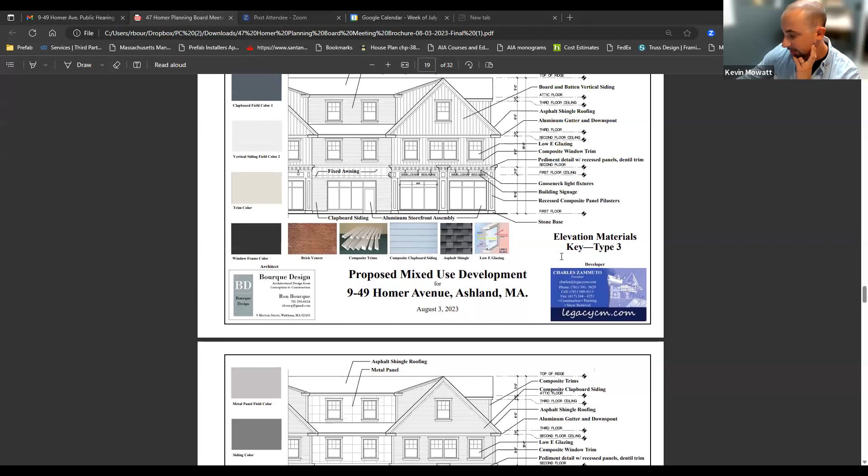So I'm leaning towards getting an option or the 3 options. I'm scratching out number 5 if we don't like that one. Could we get a perspective rendering of option 1, 2, and 3 and see what those look like in the context? I would take the view that you produced, maybe from the train tracks. Let's look at the 3D views that you have.

Keep going. Maybe this one, I don't know what everyone else thinks. What do you think, Cathy? I want to see - it's too far away. Well, it's too far away. I feel like the building's too far away.

We could see it in that, and maybe in the one where it shows it up close. Maybe the one where you don't really see much of the building, but you see the context of the train station, the one that's right below. I would do it in this one too, the one that's above here. I could zoom in on this so that these 2 blocks fit the screen.

I have a question for you. Can you stand on the other side of the street, or go down there with somebody else, and stand on the yellow line and take this photograph for the context? Because we almost can't see enough.

You're not gonna get enough of the Richardson building, as if I'm driving this car. So if I was in the right lane, looking down the street - is that what you're referring to?

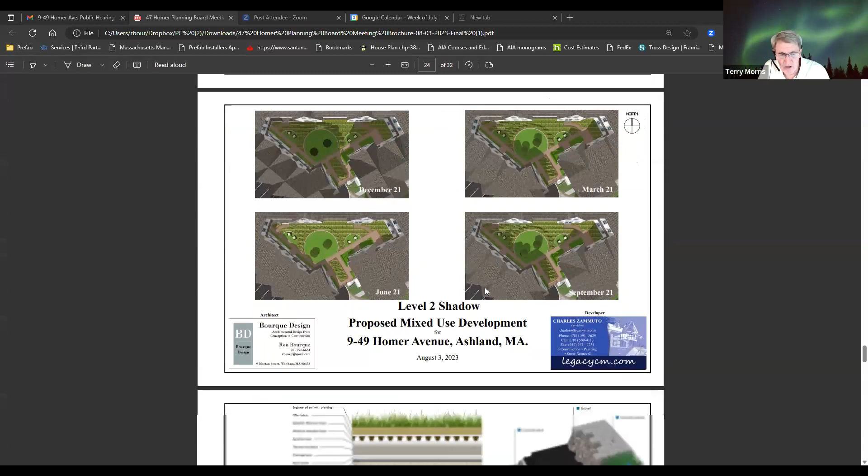Would you consider basically alternating two of the treatments? Let's say the cedar shingles and the brick, rather - I hope you're not talking about having one uniform treatment on all 5 of those facades.

If you alternate them, or look at the whole row of 5, you'll see 2 of them are larger than the other 2. The 2 on the end, as they get closer to the residential neighborhood, are smaller. Do you want to accent those differences by treating the facade elevations differently?

That's my question. I noticed that neither you nor Kevin rendered an opinion when either of those 2 were up. Well, I think it's like Kevin said, it's really difficult to tell right now.

And to see it, so we could see that as an option also. I guess maybe what we should do is present the full range of things and show how we would alternate 2 or more patterns.

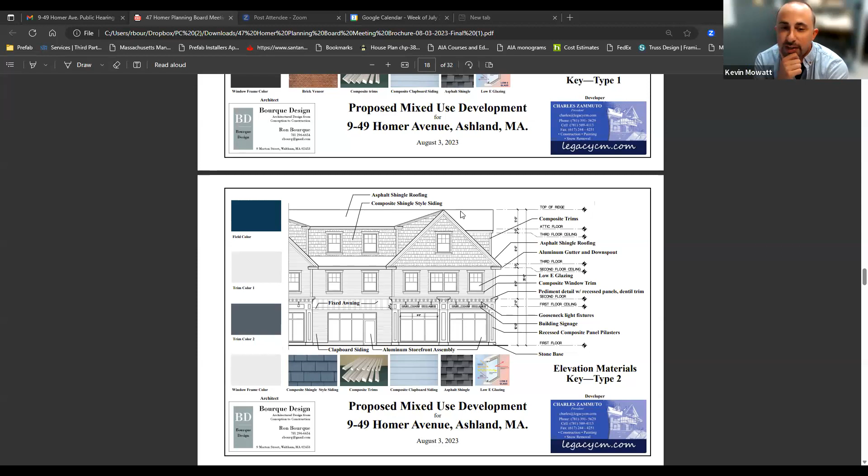Yeah, I think we'd like to see it fully rendered so that we can better comment on it. Okay, we'll allow you to use your design judgment to alternate the pattern as you think is appropriate, and then we can comment on it further from there. Fair enough, thank you.

My comment on type 1, I don't think I have right now any modifications other than making some alternating schemes. My only other comment on number 1 is that potentially the brick does not need to continue up to level 2, that it would just be maintained at level 1 for the commercial ground floor. Then I'll leave it at that and see what that looks like in the renderings.

Could we see both? Like 2 floor brick with 1. I know what you're saying in terms of that, but I actually was sort of enjoying the fact that this was 2 floors of brick, unless somebody else wants to weigh in and say.

I agree, we could see both. Because I thought that was an interesting idea to make the 3rd floor fade back into the background more, perhaps. Yeah, I think that'd be good to see.

I would opt for the 2 floor of brick. I think 1 is insufficient, there's just not enough of it. I'll show both, it's not that much work. I'll just show both so that we have a true sense of it. That'd be great, thank you. I think that would be helpful.

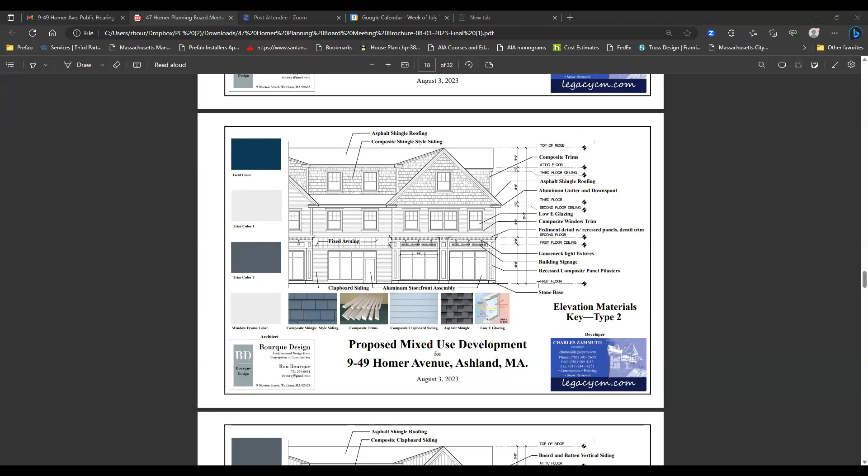Is the rendering to scale? Yes, and then on the photographs, it's a function of SketchUp where you can introduce a photograph and scale it in. Can you go to slide five for me, please? Slide 5. I think that's this. Oh, never mind, you passed it.

Right here. So right here, this slide, it seems that the building is actually sunken down where street level is. If you're following the path, the street level of the corner going across, it looks like it's actually cutting across the first level. That's why I asked if it's to scale, because the first story on the existing brick building looks like it's probably ending in the middle of the second story in your building, just to put a scale perspective on it.

Yeah, I mean, this is sort of, you can see from the photographs how it's not one true photo, it's a montage of photos put together. Especially when you look at this site, if you took a photo from here, you're picking up part of this thing. So for these types of images, you scale it the best you can. The model is to scale, it's a floor plan scale.

When you pose it on a rendering, on a photograph that's a perspective, like some of the ones at the end, you can control it - in SketchUp they have a feature where you can size it, there's a grid and things like that. On this one it's a little more difficult. I didn't understand what you're referring to.

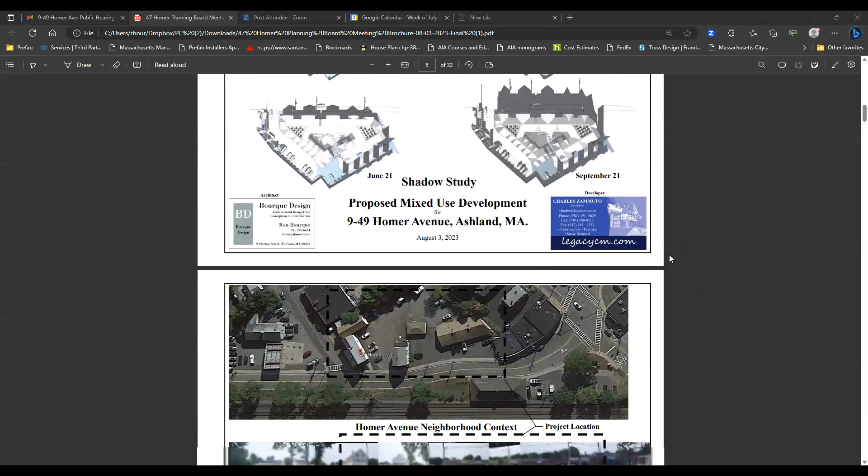The 24 spots in the - well, let me get to the one, sorry. So these spots on the surface are for commercial. And how many proposed commercial sites do you have?

We have 22. So approximately 2 spots, or you have 22 commercial spots? Excuse me - oh, commercial building portions of the building. That's what I meant - how many businesses could fit theoretically?

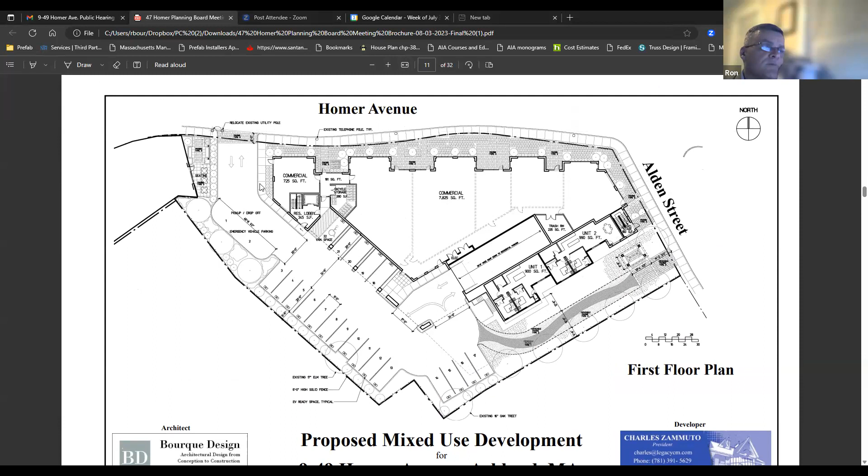Well, we indicated subdivision lines, but until you have someone who's going to lease a property, you really don't know how you're going to carve it up. But we have 1, 2, 3, 4, 5 spaces shown - 6 spaces shown. Okay, and now that you bring this up, what is the distance between the sidewalk and the perimeter of the building to the closest point?

To the closest point, I believe we have 6'6". Okay, and so the patios you were describing, what's the rough area for each patio in front of the doors? For example, this one would be approximately maybe 300 square feet. So 30 by 10? Yeah, about 30 by 10.

This 30 by 10 one, sorry - this one's probably about the same. This one is probably 150 or 200 square feet. Okay, I'm just curious for design purposes - if you put a 3-foot planter in front of your building, how much space is it between the planter and the sidewalk?

Well, if you look at the property and the sidewalk here, you'll see that it changes. So if we put a 3-foot planter, you can see my cursor, right? Okay, so if you put a 3-foot planter in this area, is that what you're referring to, or down here? On the forward portions, not near the doors - so if you're designing like a wall of flowers or plants, if 2 people are walking on the sidewalk, will they come into contact? Will the plant overgrowth encroach on the sidewalk?

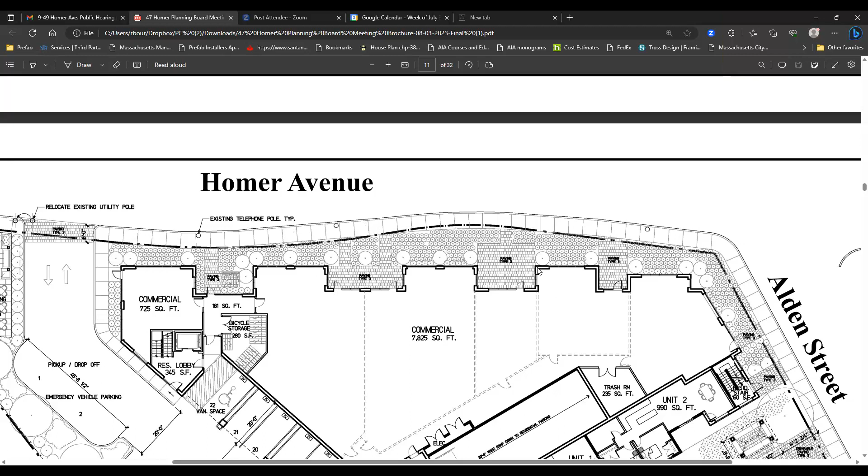I was just looking at your other photos where you said there's potential for outdoor seating, and I wanted to see the footprint of a table and 2 chairs and how they would space up correctly in that existing space. Sure. And that's all, thank you.

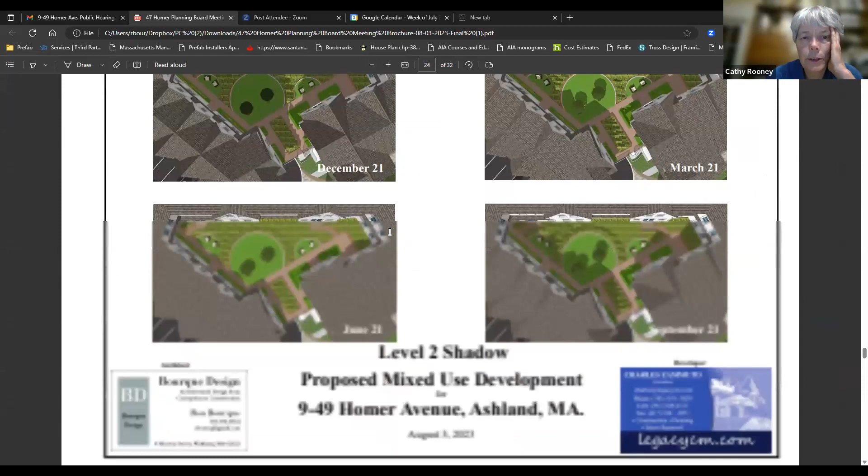Ron, you have that on one of your slides, the patio seating. I know I had it in the other package, I'm not sure if I put it in this one, I may have it on the rendering. I think you had it on a rendering, yeah, you got it on a perspective. All right, there it is, there's one view of it.

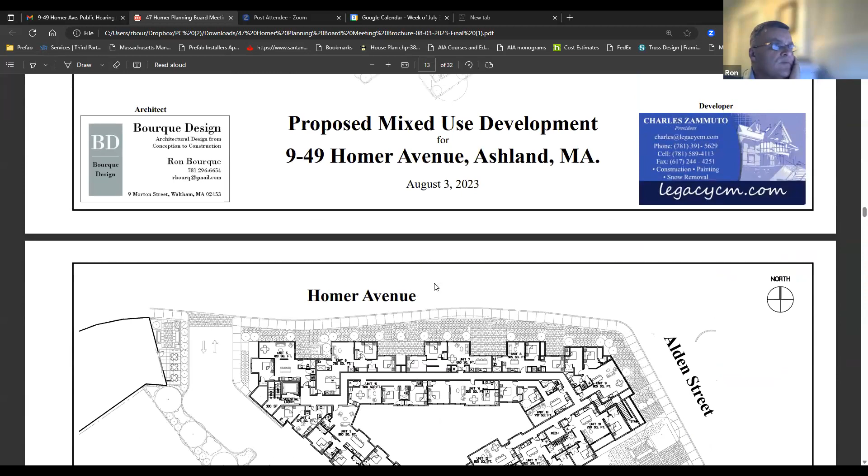Bear with me a sec. So it's one way in, one way out. As you come into the parking lot, you'll have the ability to turn around without doing a 3-point turn, as well as for residents that will go into the garage. They'll also come out of the garage and they'll use the same entry and exit.

So won't you be needing a peer study traffic report for that? I'll leave that to Terry. I don't believe we needed one. No, none was required or requested.

The blinking light was on the garage or on the? No, we would mount it potentially on the utility pole, the one that's right around the corner, so that it would have 'vehicle exiting' or whatever the nomenclature is. But this is a town street. Would they accept that to have that there?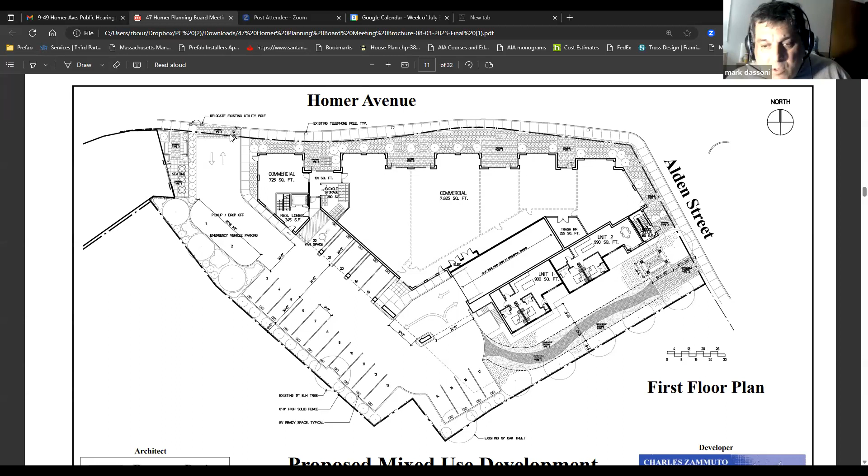And my reason for saying that is because from Main Street downtown, that turn is a quick turn. If people are coming down onto Homer Ave, it's gonna be a sharp corner. Proceeding east, going towards your site off Main Street - that's what we're talking about, alerting traffic making that corner, that turn at the pizza place. Yes, and right there there's a regulation traffic light too. So right there, there's gonna be a controlled traffic light and this garage light.

As of what I can see on this - and I have nothing against it, but this is a computer rendering of the site, right? Correct. What are you getting at, Mark? I'm getting at traffic control from downtown east onto Homer - more than one car, two cars come at the same time, and the blinking garage light - a person coming out from the site using that blinking garage light is gonna be turning left or right quickly and not really pay attention to traffic coming off east from Main Street where the traffic light is. It's gonna be a quick brake for operators going from downtown east down to Homer.

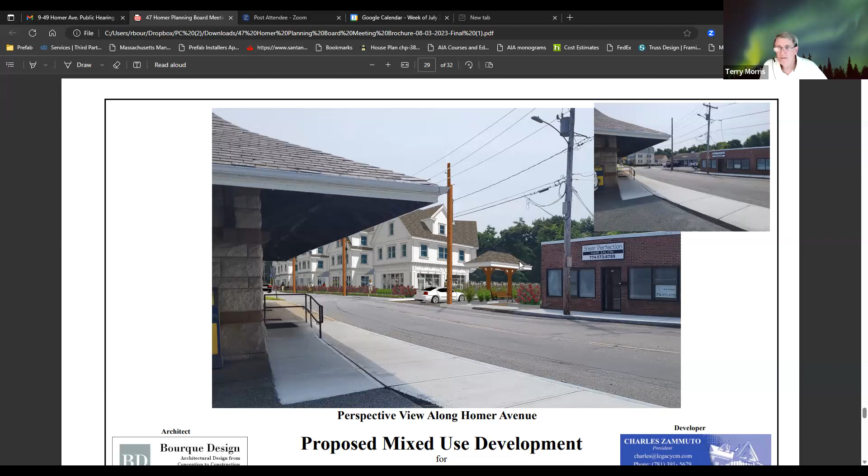It's coming from Charlie, I don't know. Charlie, can you speak now? Can you hear me? Yes. Yeah, we can. I just figured out how to do this computer thing. So, just so you know, Ron, can you go to the screen with the pocket park against the old original building?

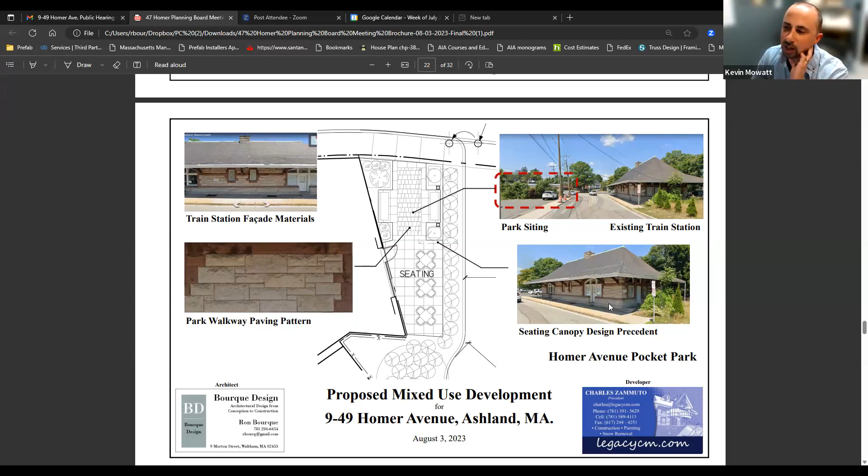Okay. You want me to keep going? Yes, please. So, signage - I think we understand that the signage for the commercial will be located in each of the recesses above the entry doors at the patio spaces. But we were looking for a general indication of residential building signage. Would that be located on the building, or would there be a sign with the name of the residential complex somewhere on the site?

Well, the entrance will have signage, as you can see here. The style and font and things like that, I just showed a generic example. But the idea is that the primary entrance and the one around the corner would have signage indicating the name that Charlie chooses for the building residences.

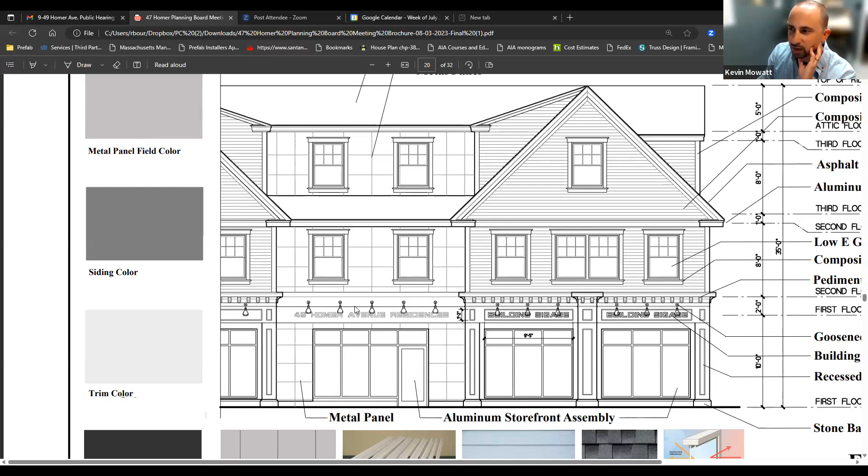Okay, so is that also an entry into a vestibule that serves three entrances - one to the residential and two into the commercial? I'm looking at the plan. Yeah, that's correct, it does. So in that zone, there might be signage for both the two commercial spaces and the residential. That's correct, so there could be signage on the wall of the glass here and signage on the wall, and then this leads to the residential lobby. So we could basically have three signs indicating which door leads to what, and then there'll be signage on this space specifically for the residential lobby.

Then you'll have signage on the front for the various commercial entities out there. That's correct. So along these faces will be signage panels that fit into the style, whether it's a consistent font or just a consistent size. Then for the main building from Homer, we'll have signage indicating it's 49 Homer Residences, or whatever Charlie chooses to name it. Once you're in this lobby, you could have a sign indicating what these commercial spaces are, and then this takes you into the lobby.

You wouldn't be able to access all those commercial spaces from inside there - you'd have to go outside to get at them, is that correct? Because you'd be walking through commercial spaces to do that, and you don't show a hallway. Right, so when you walked in this door, this would not take you directly into a commercial space - you're basically in a vestibule. There are multiple doors for this commercial space, multiple doors for this commercial space. This commercial space would have one door, and then one door back here.

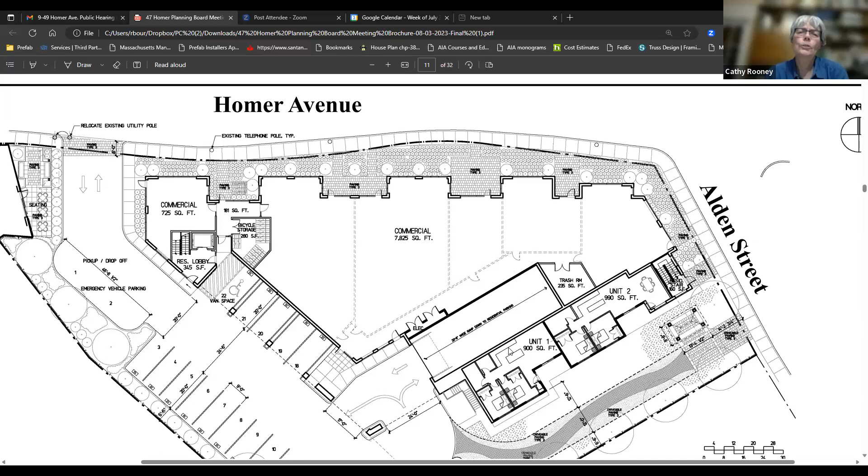How soon do you think you're gonna know who's going in there? That's a Charlie question. Can you hear me? Yes. So Beth Reynolds has been telling me that there's a dancing school that wants to take the space, and they'd probably take the whole first floor, but that was a while ago, and I don't know what the current environment is with the school. We just don't know.

Even on Pond Street, that's been done for over a year and a half. We still don't have the commercial spaces rented. Right, so it's just a waiting game.

What's the total? The total is this one, the 7,800? Right, 7825. That's the total space if all these spaces are rented by one entity? Well, plus the 725 on the left, right? Right, but that would be a separate space. So if this was rented to, for example, the dance studio, it'd be about 7,800 square feet. Okay.

It seems to me that you might not need the residential signage at Homer, just because you enter into this vestibule and then you have to go outside to get to the main residential lobby, which is really at the back of the building. I know this will all get flushed out, but I would anticipate that signage might only be required somewhere on this space, or I'm not sure. We can talk about that more, but it seems like you end up just going through the building to get there if you're a resident.

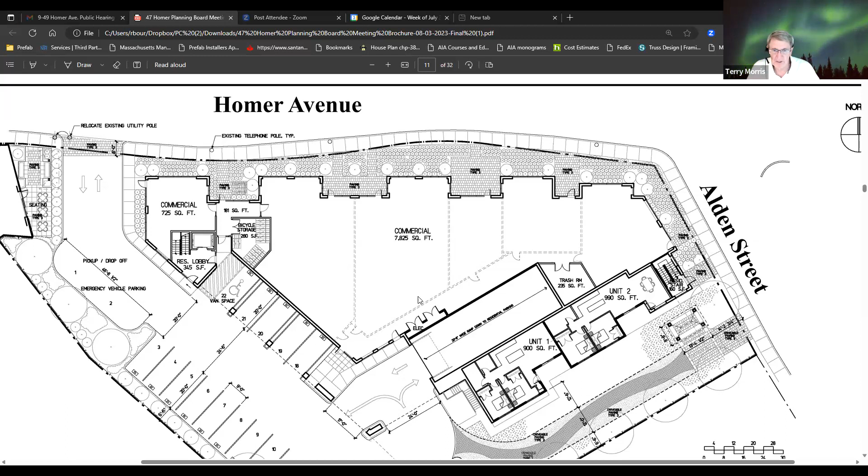That's really the question—they'll be too small. The cost to build a canopy to do the solar, there's not that much parking there. Every little bit adds up, doesn't it, Charlie? I'm looking at this—I forget how much it costs, but if I've got to spend $100,000 on a canopy to get $50 a month in electricity, it doesn't work out. Whereas if we had a flat roof on the whole building and filled it—like at 12 Pond Street, where we put 300 solar panels on the roof—on this building, we'll be lucky if we can get 50.

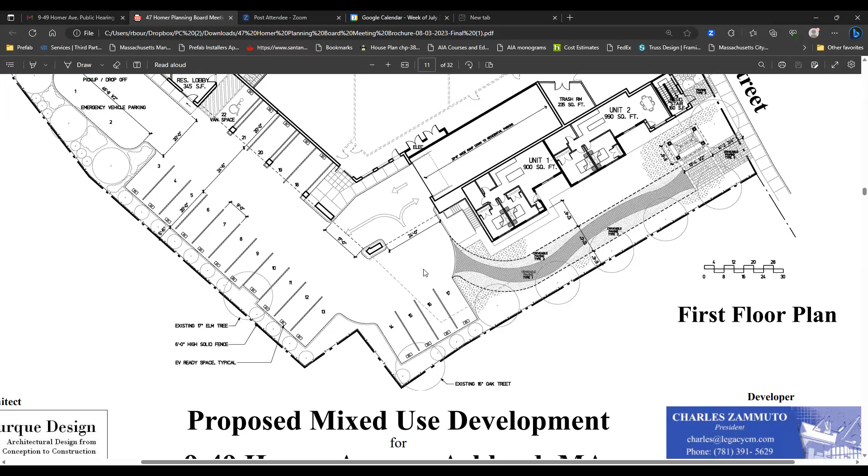We haven't had the engineer design it yet, but we'll see what he comes up with. We just installed 800 solar panels on all of our buildings, and believe me, if I could do more solar panels I would, because it benefits the property. But to build a canopy just for solar panels would require a whole steel structure—it wouldn't be feasible to do.

If you would allow me to put a flat roof on the building, I'll fill the whole thing with solar panels. I'm pretty sure the planning board isn't going to let you do that, right? Yeah, that's the problem—that requires a special permit, and we tried to avoid that cost. Did you ever do a drawing that shows a flat roof, even as a special permit option? Even if we did a fake hip roof, we could fill that whole roof with solar panels, but because of zoning, it doesn't allow for it.

The downtown Ashland district regulations are an overlay district. When that was created, there was no thought given to flat roofs. Clearly, if you look at the design regulations, they discourage flat roofs and require a special permit for them, whereas on this property we're doing the building by right. That tells you a lot about how they felt about flat roofs. That's because I think they weren't thinking about solar at the time. Exactly right, Cathy.

So Terry, going back to what Kevin just said about the fake hip roof, because I know you did that, somebody did that down there, maybe at 128 Main. Well, we did it on Pond Street as well.

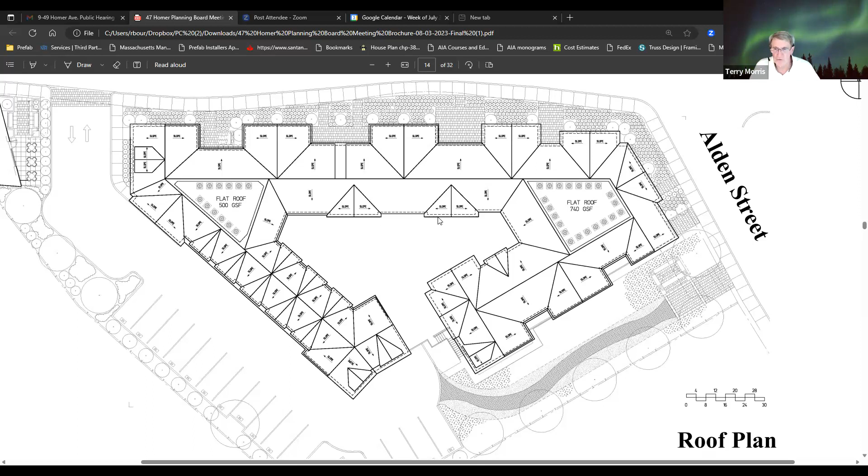Charlie, be careful—they're going to be after you to do passive house, which is the maximum standard. There was a big article today about the passive house 800 unit complex in Newton Upper Falls, in the Globe. That starts a good conversation, Terry, because the new stretch code requires essentially passive house standard. We have to be thinking about this—it's base code in Ashland because they've adopted the stretch code.

I'm gonna urge you guys to think about the shingles again, the solar shingles—see if you can ask around, see if you might get a deal from somebody to put them on there to see if they work properly.

We can put solar panels on the back of the roof because no one's gonna see it from the street. But that's about it—I know you don't want to see them on the front of the building. Or maybe we should put them on the front of the building so it encourages the rest of the town to put solar on their roofs. Yeah, I'm not sure why you think they can't go on the front of the building. Did someone tell you that?

I thought, Terry, were we told that they didn't want to see the solar panels from the street? See, Cathy, you can't seriously think the planning board would approve solar panels on the face of the building, on the roof side that faces the street. That's the single biggest pushback to putting solar panels on old houses - what they look like from the street. Some people don't care, but most people do.

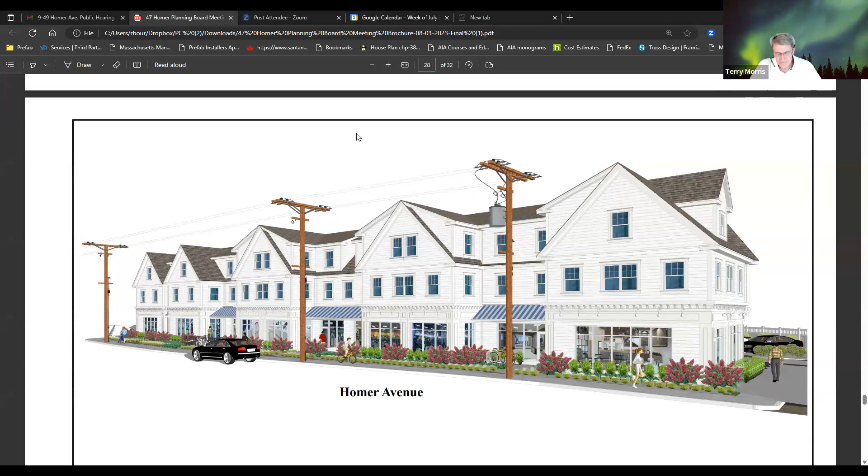Well, I can't give you permission to put it on because we don't make the final decision, but I know that the Sustainability Committee is very interested in getting them up there, and I would urge you again, Charlie, to see if you can think about solar shingles. Talk to them and ask if these things don't work properly right now - are they gonna be ready to go up on my building, and will they work properly?

So, I know we were gonna get deep into solar, and I have an engineer that works at MIT who designs all our solar. He builds cities in Dubai, he goes to India, he goes all over the world building cities that drink rainwater and toilet water, and builds all these solar farms. He's the one that designs all my buildings. When we permitted Pond Street, he came to the meeting and spoke in front of the board for that one.

When we go back in front of the planning board, I can have him come and speak on that board. Well, I just think you need to think about it, because I know that the Sustainability Committee is very interested in getting to net zero, and they've come and talked to us about it, and I think you should really think about it.

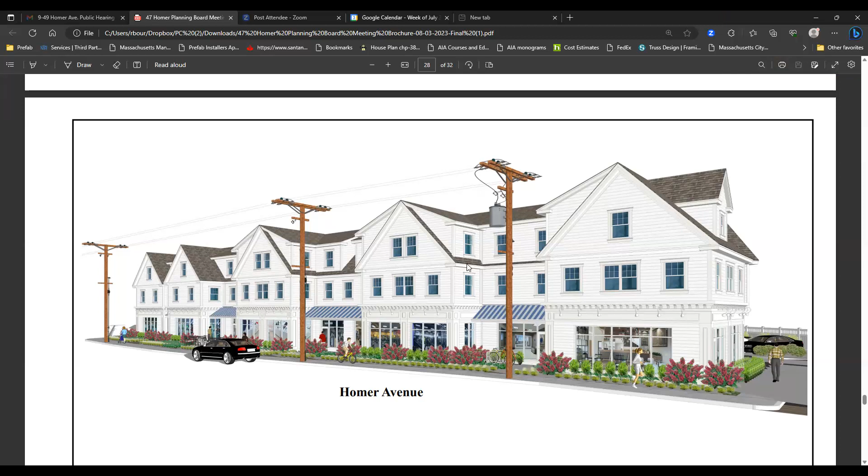I'll look into it, but I know in the past when I looked at roof shingles, they weren't reliable enough yet. Well, when I saw that Harvey had them for sale, it was well over a year ago. So I'm hoping they pass the smell test, if you will, and that they work properly. That was an alternative to Tesla, because I knew Tesla had problems at the time. I'll take a look at it. That'd be great, thank you.

Anything else? I would crunch the numbers, Charlie, on the solar canopy too, just to put that option to bed.

The problem with the solar canopy is the structural engineering would have to be so strong to hold the snow loads and all that stuff. For that small space, it wouldn't be worth it in my mind - I could tell just by looking at it roughly how much it would cost to build that structure, whereas the roof of the building is already built and designed for the snow load, so it's easier to just throw them on a roof. I have no problem filling that whole building with solar panels, if they allow us to do it.

Yeah, I mean, the solar canopies are becoming more typical in parking lots, and so they can be done with a snow load. Yep, they just might be expensive. It's the cost of the structure - it ain't even the cost of the solar panels.

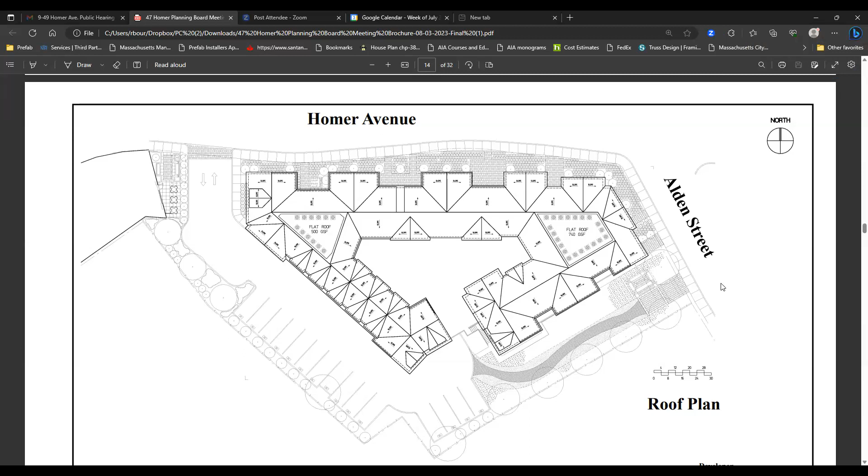Okay, I'm going to do a last call. If we don't have any more comments, I think we're going to close the hearing. Can I get a vote to that effect? A motion to that effect, 10:30. Motion to close the hearing for 949 Homer Ave, 947 Homer Ave. I'll second that.

All those in favor? Ujjwala Paunakar, aye. Kevin Modai. Cathy Rooney, aye. Bill, you still here? No, he isn't. Okay, so it's unanimous. Thank you, everybody, very much.

Chair, what happens next? Do you make a recommendation to the board, or how does that work? We're going to go through our report. I don't know how much of it will get done tonight. We'll fill in all the comments and questions we have, and then we're going to send it off to the planning board.

We've been having a lot of meetings. We actually just sent a letter to the planning board asking about getting some environmental impact statements for the site and for the building because of the proximity of the railroad, the Richardson building, and the gas station across the street.

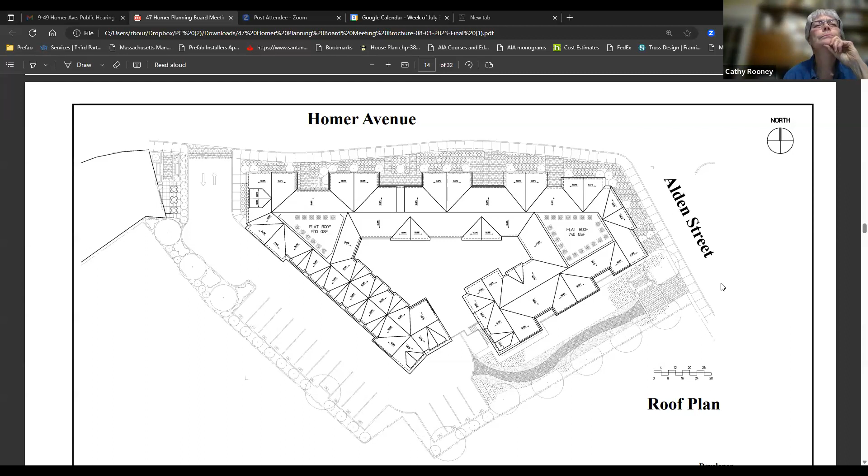Who monitors it? Essentially, when a special permit is filed and plans are submitted, that's one of the things they review during zoning, design review, and site plan. At the end, when putting together the council order, they deal with things like whether there's ledge on the site, which could mean blasting—exactly—and they assess it based on information from the presentation and questions asked during the public hearing process. So the city council monitors up to a certain point and makes a determination, and then it's monitored by the planning department, who has to sign off on any building permit before it goes to inspectional services. That's how it works.

Okay, so it's a planning department, not a land use department. But yeah, because the planning department are paid staff, city councilors are paid, but they're part-time elected. Right, like the select persons. Okay.

Okay, well, that sounds pretty interesting. Thank you. You're very welcome.